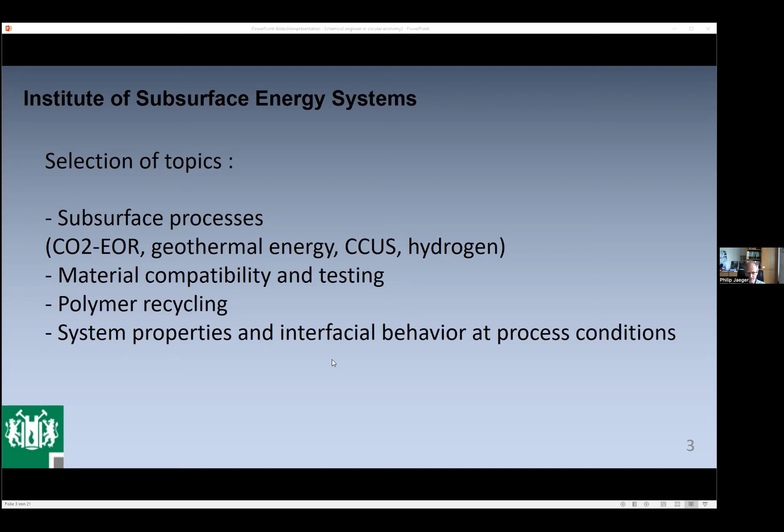What is needed is, apart from the drilling, which is more the mechanical engineering side, from our perspective of chemical engineering here at the institute, we have to do with material compatibilities of pipelines and all the equipment that is needed. I will be talking a bit about polymer recycling, because part of the tube liners are made of polymers. And what is my specialty is the system properties and interfacial behavior at process conditions.

So let me also advertise a bit for our community, what is so special about the chemical engineer. If you look at this really distinct program from today, you will recognize some of the points I'm trying to point out here. I would say, I hope you agree, my co-presenters here, that we know how to handle energy and mass balances, and we also have a slight memory of what the second law of thermodynamics is. This is why we have somehow the thinking of process efficiencies incorporated, which is also reflected by one of the talks later.

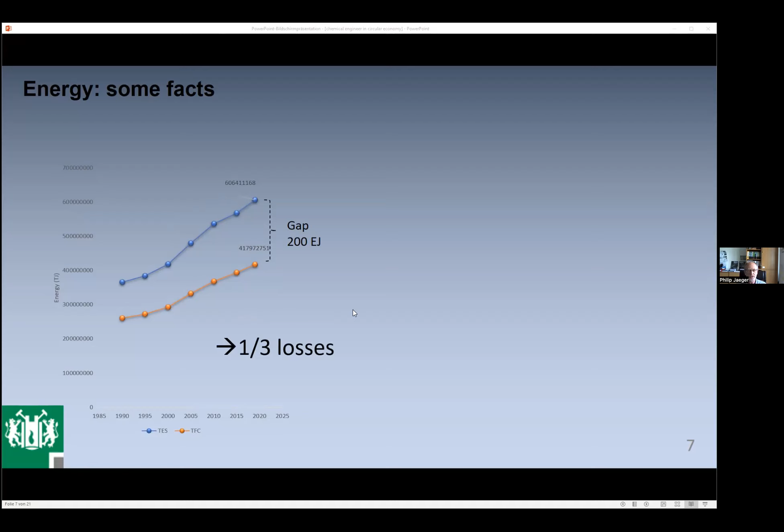On the other hand, we have to ask what is the energy actually used for? We're driving a lot of innovation and inventing super sophisticated methods, and at the end of the day, 30% of the energy is just for low enthalpy heating. So these are points that I'm starting out with to motivate a bit deeper look into this.

So with this background, everyone is talking about the hydrogen economy. Billions are spent from the state to foster this development. And the question is: is the hydrogen economy the solution of our energy demand? So having this in mind...

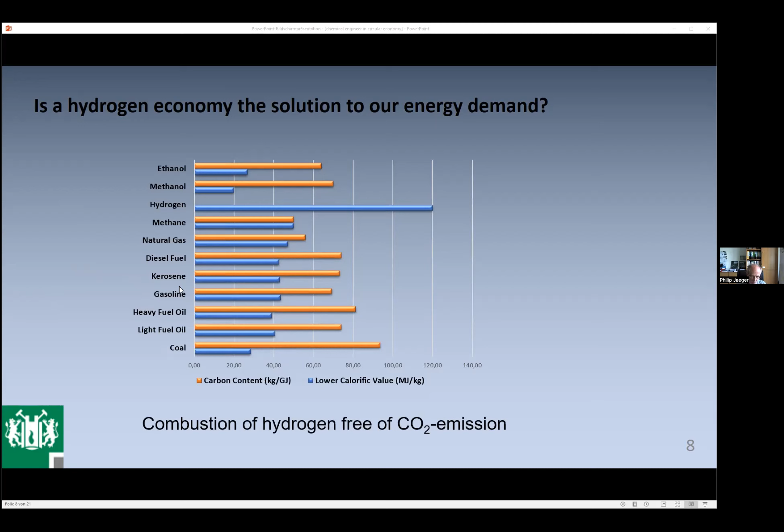In the first place, it looks very promising. Hydrogen has the highest specific calorific value in terms of joules per kilogram, and the combustion of hydrogen is free of CO2 emissions, so best choice.

If we take a little closer look into the energy density, we see - okay, if you compare the mass-related calorific value, you're right, there's nothing better than hydrogen.

But now comes the high-pressure experts and say, okay, what do we have to do to get a kilo of hydrogen? And at the end, we have to provide volumes to store our chemical energy. In the next talk, you will see what it means to store volumetric or pressure energy in vessels, and it's all about volumes. So if you look into this picture in terms of volume-related calorific value, it's getting different.

So hydrogen at atmospheric pressure has nothing actually. And when you pressurize it to 100 bars, which could be a storage pressure in salt caverns, in some of them at least, you're still at less than one third of the value that you can obtain with natural gas, which is currently applied.

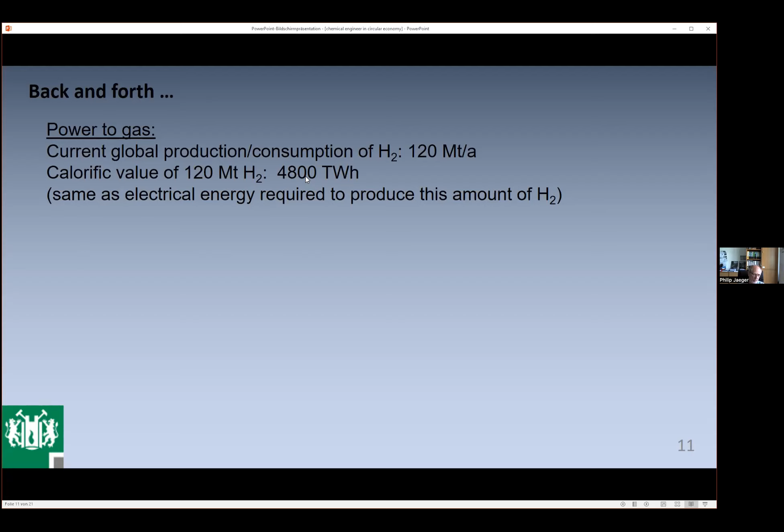But yeah, so we have this hydrogen now, and we have this power to gas - we created chemical energy. As I said, we have around 4,800 terawatt hours of hydrogen calorific value, which we needed about the same amount to produce. But now we have to transform it again back to power.

And then, what do we have there? Like fuel cells, combined localized energy plants or power plants, or the electrical vehicle with its efficiencies. And here some numbers that are also interesting to have.

The electrical vehicle needs 15 kilowatt hours per 100 kilometers. And at the end of the day, you can store maybe 4, maybe 6 kilograms of hydrogen in such a tank at very high pressures, up to 350, or in an individual vehicle, maybe 700 bars. But the refueling technology is also a topic on its own, which would fill its own presentation actually.

So at the end of the day, we call it round trip efficiency, and it's maximum 30%. So this whole hydrogen economy, in terms of energy efficiency, is just like a dissipation technology. So as long as everything is driven by solar and wind, we're okay.

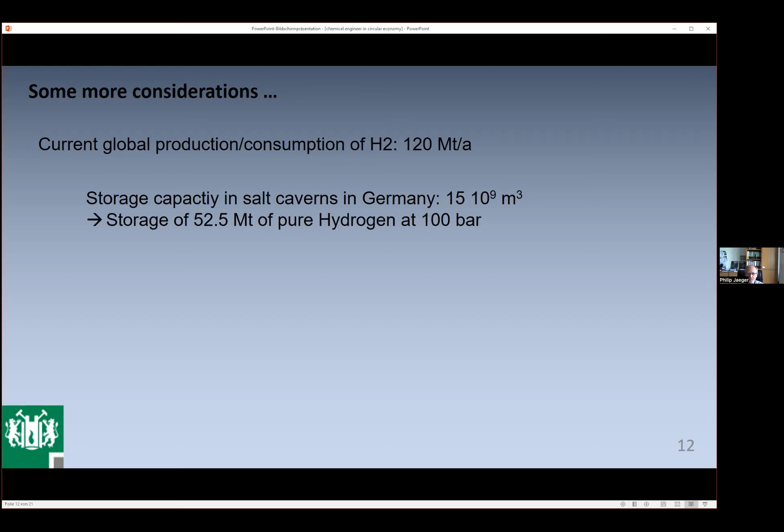So if we solved all of this, hydrogen is still diffusing. It's a small molecule, and we know this from CO2 or from natural gases, how they behave, how they absorb, how they diffuse. There will be hydrogen diffusing to the atmosphere because there's no such thing as an absolute tight reservoir or plug.

And then comes the point: hydrogen is not climate neutral, so it does something. There are reactions going on, or it's working as a scavenger. There's natural gas that is not reacting in the atmosphere when there's also hydrogen present.

So if you look into it really from a scientific point of view and facts-based, you have to say that not even hydrogen is climate neutral. I'm not saying that hydrogen should not be part of the solution, but we have to look at it from a facts-based perspective, and my intention is to give you some numbers to start looking into these processes.

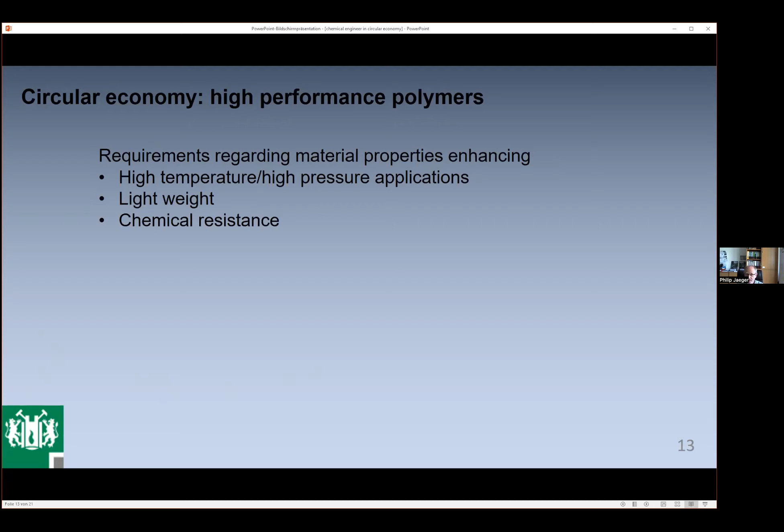The demand is that they should sustain high temperatures, high pressures. They should have lightweight, chemical resistance. So all fine, and we're on a really good way.

But there are also new challenges coming up for recycling. We're just now discussing recycling of the old known polyolefins and the common stuff. And now we already have to talk about what is going to happen with all these new materials. We have to look into the second life already during product design, and think not always of downcycling, not only using the old polymers for wastewater pipes and so on.

So these high performance polymers are used in H2 tanks and pipelines, batteries, and photovoltaic applications, aeronautics, membranes, wind turbines, geothermal wells, and so on.

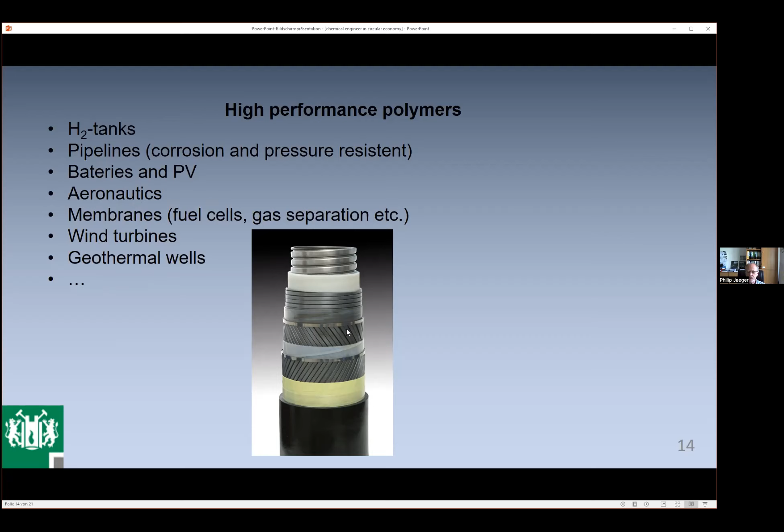This is just an example of one of the materials that is now being re-innovated, let's say, a so-called flexible pipe that is built of a lot of layers. These flexible pipes are used in lengths of kilometers in the subsea for producing oil and gas, but in future also for carbon capture and storage.

And you see here the polymer liner is the essential part, the barrier that keeps the gas and the oil inside, or the fluid or whatever you have inside this pipe, while you have a lot of steel tensile wires and collapse carcasses and everything that make this pipe super heavy and very expensive.

And also failure sensitive. So the new solution is to have fiber reinforced polymers with only one single layer, and they're pressure resistant, corrosion resistant, and everything.

So there comes the problem: how do we recycle these polymer composites? For recycling, we have basically these 5 options.

Landfilling would be the simplest. You just mill it and grind it, then mix it with some other stuff for making streets or houses. Then incineration, now commonly called thermal recycling, which is technically simple, but you have these emissions, loss of material. This is a no-go in the future.

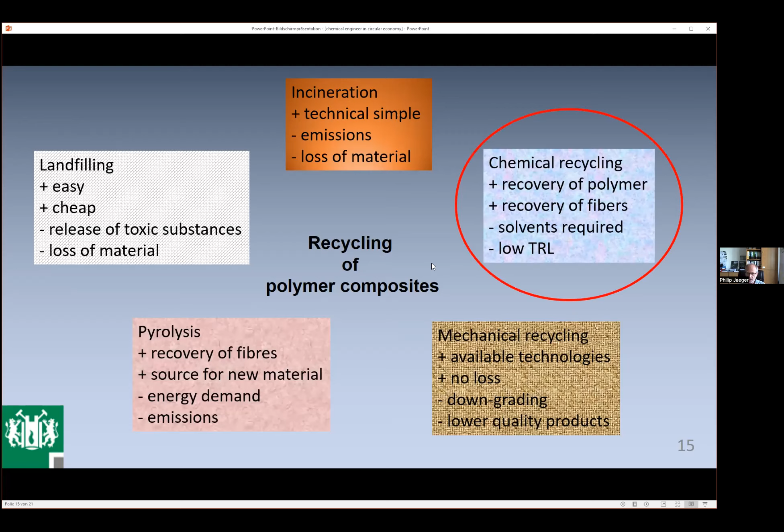But if we look into this, maybe we as chemical engineers can add some value to it. The chemical recycling would work through solvolysis, and somehow you have to separate the polymer and the fibers. At the moment, the fibers are very valuable and are very high price products. So we come here as engineers, as chemical engineers, to find a smart combination of these processes. Since we are able to think in analogies and synergies, we may be able to come up with a solution.

And we have to think of a market for a new product. I'm talking here to specialists in this area, which I'm not, but we will listen to some talk later about this new type of materials.

So coming to my last point, actually the education. Nothing in innovation and development will happen if we don't have skilled personnel. So there's really a demand for knowledgeable, critical, and creative brains.

And this is what I was finding—I was working in industry before, and I came back to university here 3 years ago, and I'm seeing how this development goes. The lack starts already at school, but it continues at university, especially the point of critical and creative brains. If you're just learning and focusing on your exam, you may not have time to really think of innovations.

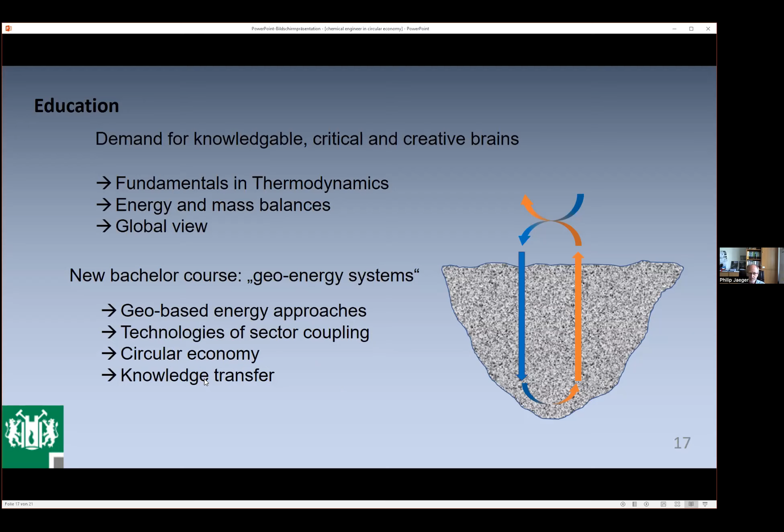Circular economy, of course, should actually be common sense and knowledge transfer. Just as an example, at the beginning I pointed out that 30% of the consumed energy is actually for heating at low to moderate temperatures. So why should we combust high valuable natural gas to heat our houses if we only need like 30 or 40 degrees?

At the moment, the heating demand—this 30% that's lower than 90 degrees—is covered by oil and gas. And even what we call Fernwärme, the long distance heating, is more than half fossil fuels. There's only a little portion of renewables really implemented here.

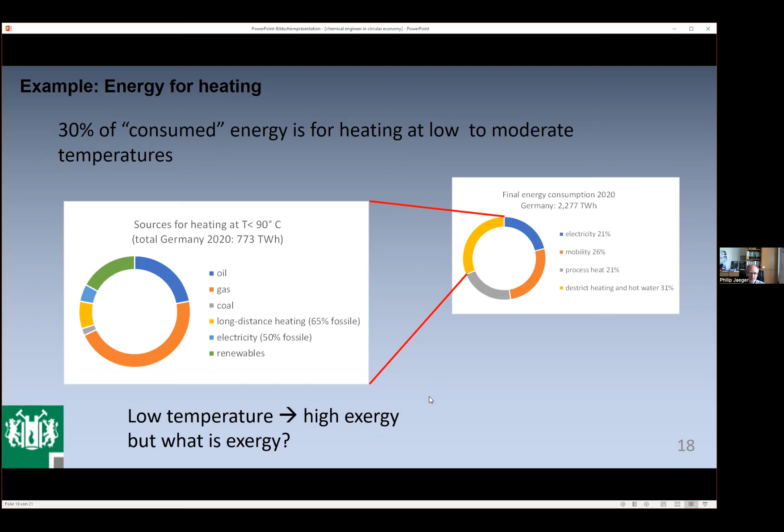What these students have to learn is, as I said, the thermodynamic fundamentals, and that low temperature is high exergy. And what is exergy? I'd like to leave you with this question.

And just finish by saying, what are the challenges for our future education? Because we're focusing on simplified concepts that are offered by the media and politics, and we have to give answers—like maintaining objective standards, supporting broadening perspectives, and generating the conscience for the consequences of what we're doing and what mankind is doing.

But we shouldn't leave out of our focus generating curiosity and fun, which in my opinion is getting lost. So technology is increasingly becoming the bad boy as such, because there's always some sort of consequence of what you're doing.

So our challenge is, just to sum up, and getting back to the very first slide, to make use of energy saving as an energy source. This is also to create a conscience for this, to apply the energy and mass balance on a global scale in the right way, to minimize the exergy losses and to provide high quality education, which is sustainability goal number 4. I want to thank you for your attention and for listening, and I'm open to questions.

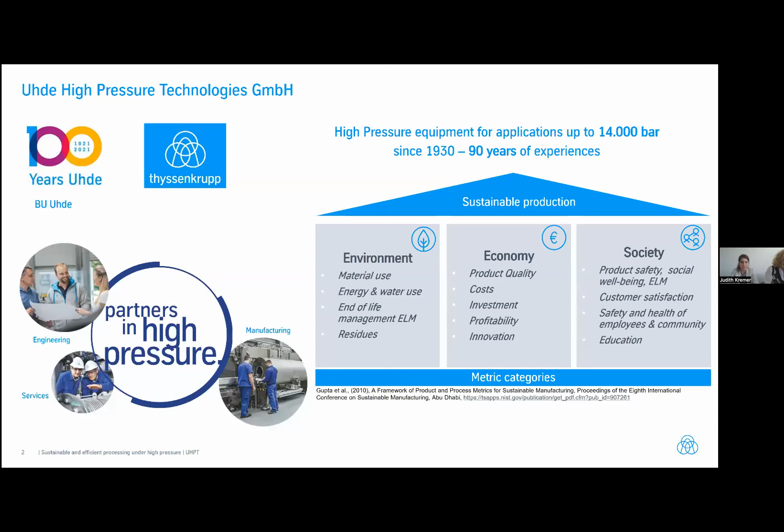Creating sustainable products means using sustainable processes that minimize negative environmental impacts, conserve energy and natural resources like water and gases, that are safe for employees, communities, consumers, and at the end of the day, that are economically sound. Our examples of Uhde activities today are intended to tackle some of the metric categories within all three aspects: environmental, economical, and social aspects of sustainability and sustainable manufacturing at different stages of the life cycle of high pressure units. Just before we go on, in a nutshell, what are our products for high pressure processes?

Starting from the lowest pressure applications, we produce valves and pipelines for the chemical industry, fertilizer units, urea units, then further on autoclaves and pipeline reactors, heat exchangers, and high pressure pumps also for the chemical industry, LDPE plants. That is a very well established part of our business. For high pressure, we also build high pressure equipment like high pressure pumps for water jet cutting, which are used in a variety of sectors, from material industry and automotive industry to food industry, for example, to remove bones from fish fillets in a very short time.

Today our examples will refer to our turnkey solutions, which are lab, plant, and industrial scale units for high pressure processing using supercritical fluids up to a pressure of 100 megapascal, used in the pharmaceutical, food, and material sectors.

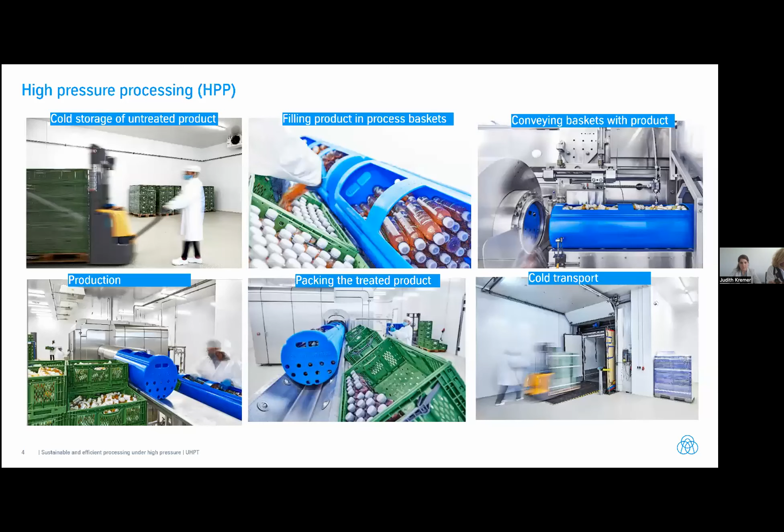Production of HP units dates from the late 90s, starting with production of pressure assisted thermal sterilization, so-called PATS units, with a horizontal high pressure vessel and an internal intensifier, combining pressure and temperature simultaneously to achieve, for example, sterilization effects in a very short time.

These units are still produced today, and they are mostly used at universities and institutes for research and consulting activities.

Ten years after starting production of PATS units, the company used accumulated know-how in building high-pressure vessels and equipment like high-pressure pumps, as well as other resources in-house, to build standard HP units for industrial use. Today they are sold in various sizes worldwide, from Oceania, Asia, Europe, and the USA.

The first concerns about sustainability start in the design and manufacturing phase. Namely, all the core components of the high-pressure units, like the high-pressure vessel, the high-pressure yoke - that dark blue frame which absorbs the axial forces during pressurization of the vessel - the pipeline, and the components of the external intensifiers, which are intended to build pressure in a very short time, are exposed to very extreme pressures and highly corrosive fluids like tap water.

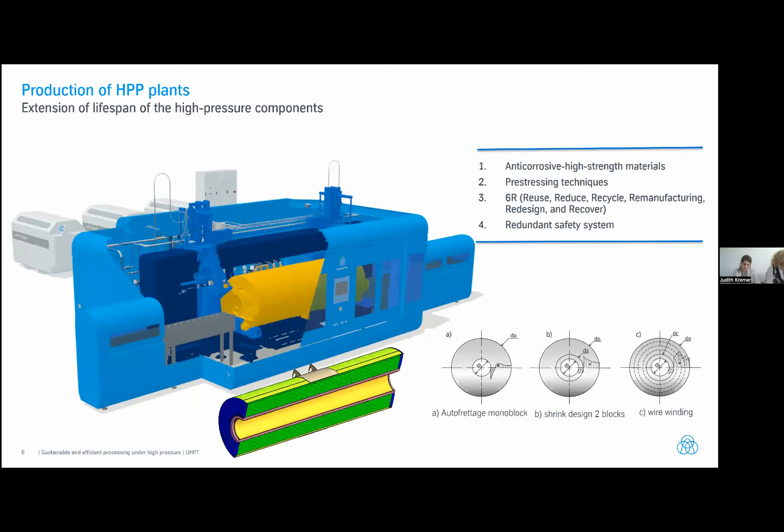The same methodology is used also for the yoke, for the frame. It's not only design, but also use of the units can decrease not only operative costs and investment.

It is also possible to decrease CO2 footprint and energy consumption by smart use of these units. For example, by choosing the right geometry and size, as well as the type of packaging, we can also influence the energy consumption per kilo or liter of the product by increasing the filling rate of the high pressure vessel with the product.

By using bulk packaging like bags or kegs, for example, to produce juice, we can also decrease the use of packaging material, which can be correlated, for example, with CO2 equivalents.

This is just an example for comparison. If you use kegs instead of small smoothie bottles of 250 to 500 milliliters, we can achieve three times less PET use, 4 times less energy consumption per liter of juice, and up to 3 times less CO2 footprint.

Also, HP units are used for sustainable food production commercially, for shelf life extension, safety, efficiency, upcycling, and added value. All these applications can contribute to sustainability in all 3 aspects: economical, social, and environmental.

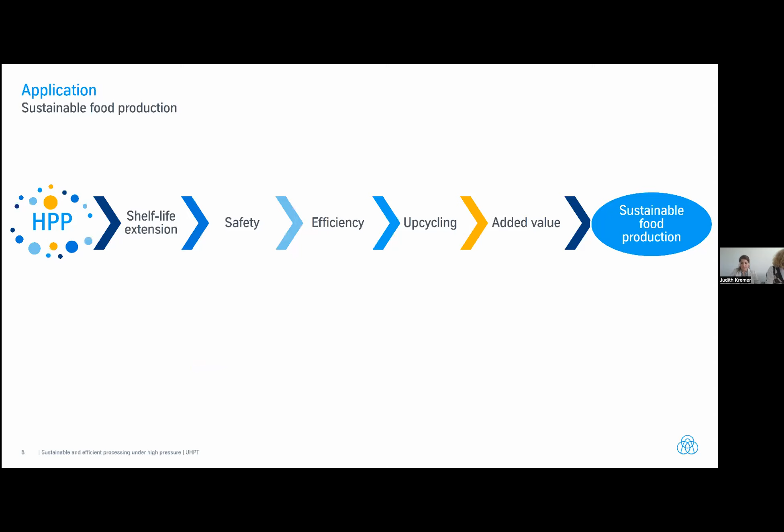For example, by extending shelf life, we can decrease food wastage, overprocessing of food, and save resources like water and land. We can also improve the local economy because local producers can place their products on distant markets and profit from it.

Increasing the safety of the products is very important for improving public health and the environment, and has a positive effect on the environment because of less meat to be disposed of, and this can also be correlated with CO2 footprint.

Efficiency: HPP can be used also to open seafood without using a knife, without contamination and discard of the product. It can be used to get a product with high quality, higher price, and it improves also the well-being and safety of the employees.

Very popular, Professor Aga said, a circular economy. Also with HP, we can contribute to that by using discarded vegetables to produce high added value products like smoothies and profit from it, while saving resources at the same time.

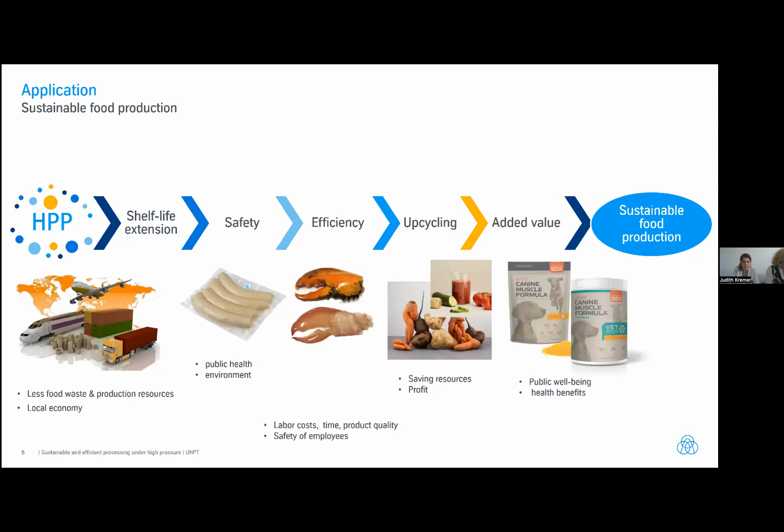Also, other plant bioactive components can be concentrated and kept safe in food. So it is good for the well-being of society.

This is just for illustration, what kind of numbers can be used to correlate the influence of the process to the CO2 footprint and energy saving per kilo or liter of product.

Also transport costs. Here you see the shelf life extension can be from a couple of days to a week, or a couple of weeks up to a couple of months extended, which helps to save a lot of transport costs, reduce overproducing of food, and is also helpful for the environment.

Efficiency also affects the yield of the product, the hygiene of the product, and quality of the product, which can also be related to some financial metrics like profit, or savings of food and resources to produce the seafood.

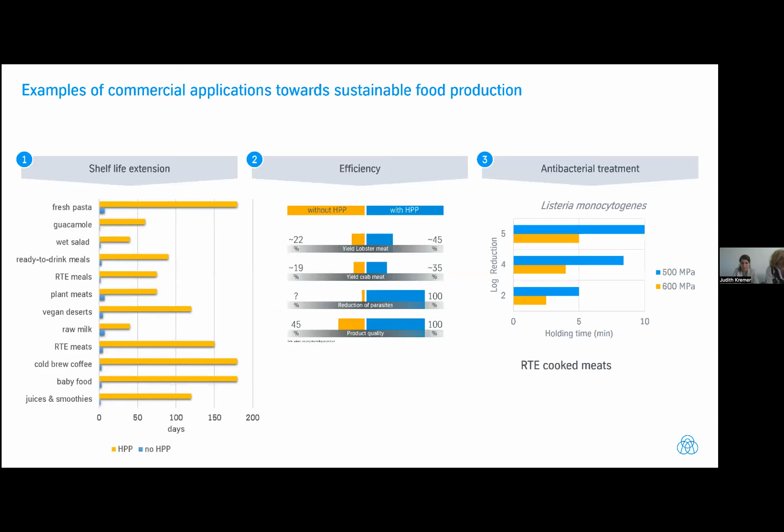Of course, the reduction of contamination of meat with HPP saves a lot of meat which would normally be discarded because of normal pathogen spoilage.

Among the applications, the fast-growing markets for HPP are definitely the meat sector, juice sector, and vegetable sector. But in the last 10 years, HPP service and contract service for the treatment of different food has also become a very well established method.

This supports local producers who don't have the budget to buy the machine, so they can use and benefit from HPP methodology. That's why we also opened our HPP center in Germany to support the local economy by offering the machine for the local industry.

But that's not the only sustainability aspect covered by this. We also use this center to improve our equipment, optimize production processes, test new components in the real industrial environment, and explore new applications with our partners in pressure - our customers, DIL as a strategic partner, different universities, professors and students. We look forward to seeing you in our HPP family.

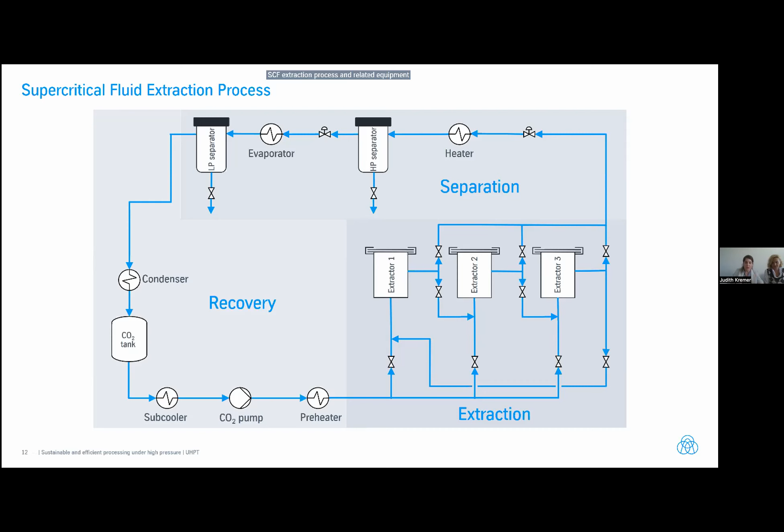This one was for extraction, therefore it has a high design pressure of 1100 bar, only 2 extractors, 2 separators, one operating at a quite high pressure, 200-300 bar, one operating around 60 bar, then the CO2 pump required for the process, the buffer tank, heat exchangers, valves, instrumentation, and everything.

So the footprint of the whole system is quite compact, roughly 9 to 6 times 6 meters. So it's one of the smaller systems, I would say.

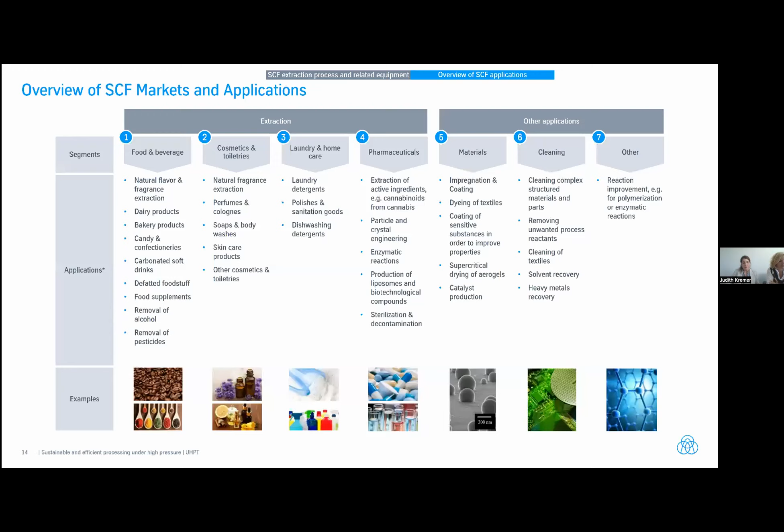In another talk you will hear more about special materials which can also be produced using supercritical CO2, when you look at aerogels, but you can also use CO2 for impregnation, coating, and so on. There are a lot more. But why are there so many applications?

That is because supercritical CO2 provides, I would say, unique advantages when used as a solvent. You have a quite gentle treatment of the product because you have low process temperatures, around 40 to 50 degrees for most of the applications.

You do not have the need to process your product with organic solvents like hexane, which could leave residues in your product or which must be separated with quite an effort from your product after extraction. You have an easy separation and only a few process steps when you use CO2 extraction, so it's quite an easy process, as I already established.

Furthermore, CO2 is non-toxic and environmentally friendly, therefore it is usually considered a green solvent. But with the increasing demand regarding sustainability, I would like to have a closer look if we can make the process of CO2 extraction even a bit more sustainable than it is right now.

For example, we have a kind of loss when we depressurize extractors after the extraction to atmospheric pressure. There is a bit of CO2 which we lose in smaller systems or in industrial systems. So again, coming back to the process flow sheet from before, I'm talking about the highlighted area in orange here, the recovery or supply part.

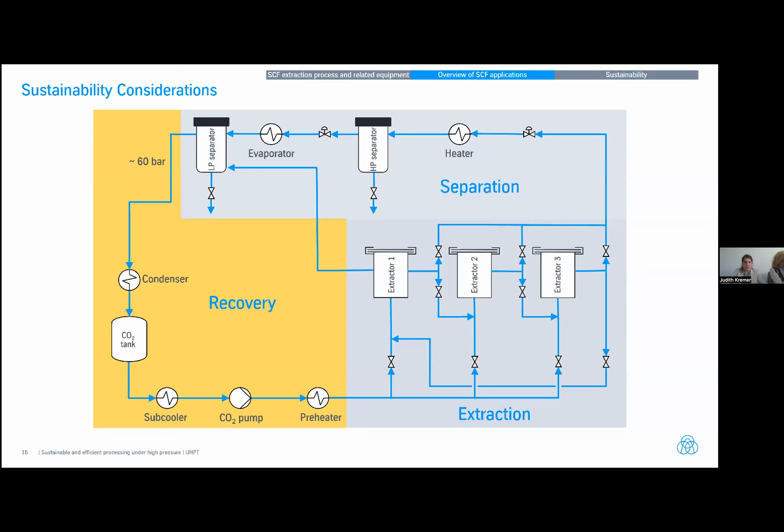We usually use or reuse the CO2 during depressurization of the extractors down to a pressure around buffer tank pressure, around 60 to 70 bar or something like this. So from extraction pressure to the 60 bar, this is recovered, but the rest is discharged to atmosphere, for example in the smaller systems, in a lot of systems.

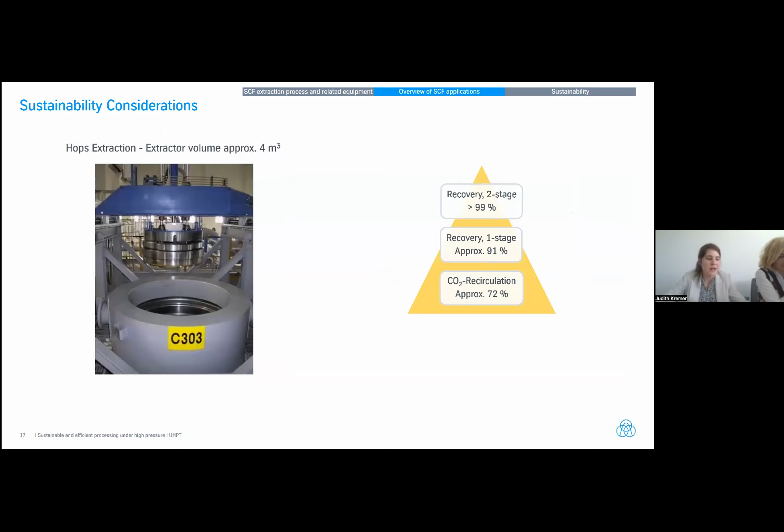This is fine for smaller systems, but if you look at the industrial side, for example a hops extraction plant, which has several extractors with a net volume of approximately 4 cubic meters, so these really large vessels, there, with every cycle, we lose CO2 from 60 bar to atmospheric pressure, and this gives us a large CO2 loss.

With the normal CO2 recirculation from low pressure separator to the buffer tank by just condensing it, you can reuse approximately 72% of the CO2 which is inside the vessel during extraction. If you add a one-stage recovery system, which consists of some vessels and a compressor, or just a compressor, you can recover approximately 91%, so approximately 20% more of the CO2 which is inside the vessel.

And when you even add another stage, a two-stage system, for example if you add another balloon to the system, you can recover more than 99% of the CO2 which is in the vessel during extraction. Of course, you have further losses in your process, meaning you will have some losses during venting, cleaning, or other things, depending on pressure, temperature, and times, which are not considered in my small example calculation here.

But what you have to keep in mind is, of course, we recover more CO2, which is a good thing, but we also have a high power consumption because we have more equipment, meaning more investment costs up front, and also a higher energy consumption because we have to run the compressors, and also add some coolers to the compressors so our CO2 would not get too hot for the process. Therefore, it's always a bit of a trade-off what you would like to do, and it's really worth it to calculate if CO2 recovery, and what kind of CO2 recovery, is the best solution for your specific system.

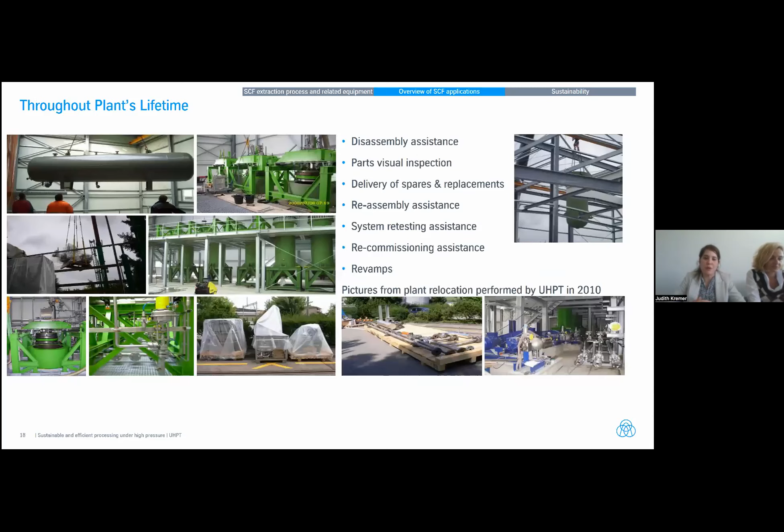Jasna and Judith, many thanks for this extensive information that you presented. We have two questions. First question for Jasna: is it possible to send references of the results of the carbon footprint presented? They look interesting, but I have some doubts.

Yeah, it is possible. These are basically public data which are used, some from the Austrian Institute. They calculated CO2 equivalents for the production of one kilo of PET, and we combine it with our information on the filling rate, so yeah, it is possible to send it. My email was on the last slide, but it can also be found on the internet site, so they can send us a request.

Okay, thank you very much. The next question is: what properties define the shelf life extension, and why are there such big differences between them, like such as milk and baby food?

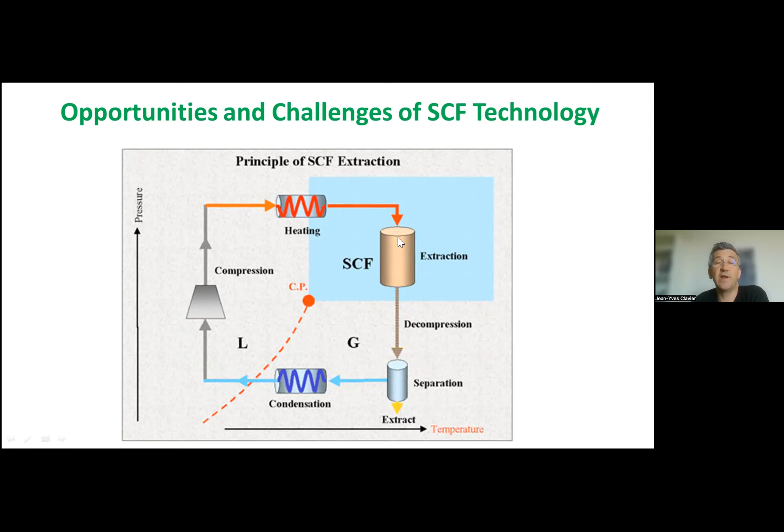Now, after speaking of the opportunities, when you look at the challenges, we have quite a lot of limitations to deal with. The technology is a high pressure technology. Uhde is quite an expert, and we had a nice demonstration, but still we have to face the cost of the technology, even if, as Judith showed, it is a long-lasting system. We can use it for several tens of years. We also see some systems that are 40 years old still working very nicely. So we have to take that into account when we try to convince customers to use this technology.

And we also have to admit that when we use flammable solvent, it is also costly. So we have to deal with the cost.

We use CO2, as I said, but one limitation is that we don't have so many choices. So using CO2 induces a limited range of application, because CO2 is a very nonpolar solvent, and we usually have to face very limited solubility of our product. So sometimes it's an advantage when CO2 is a good solvent, but it really restricts the number of potentially economical applications. But well, we have to face that. We cannot play with this as engineers.

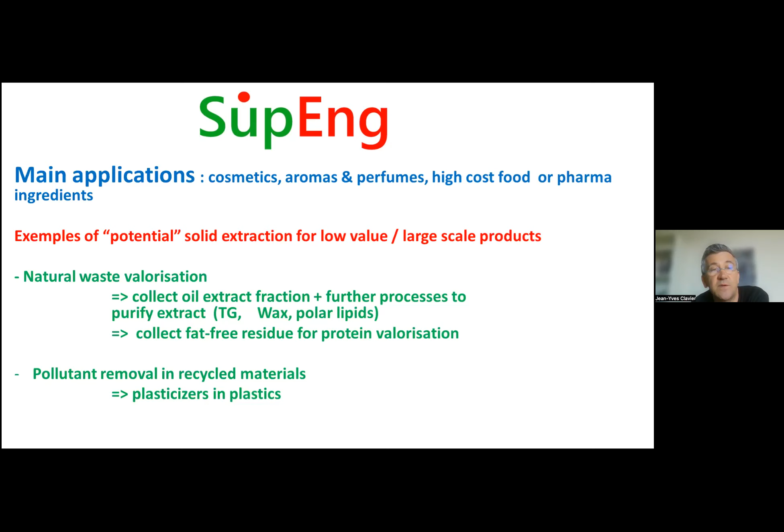So let's try to see what are the consequences for the optimization and for the chemical engineers.

We have to use the system as well as possible, so usually we try to make it as continuous as possible for the CO2 loop. We try to pump continuously, and this is why, as Judith showed, we use several extractors. We have one that is continuously extracting and the other one used for this sophisticated depressurization procedure for changing the product.

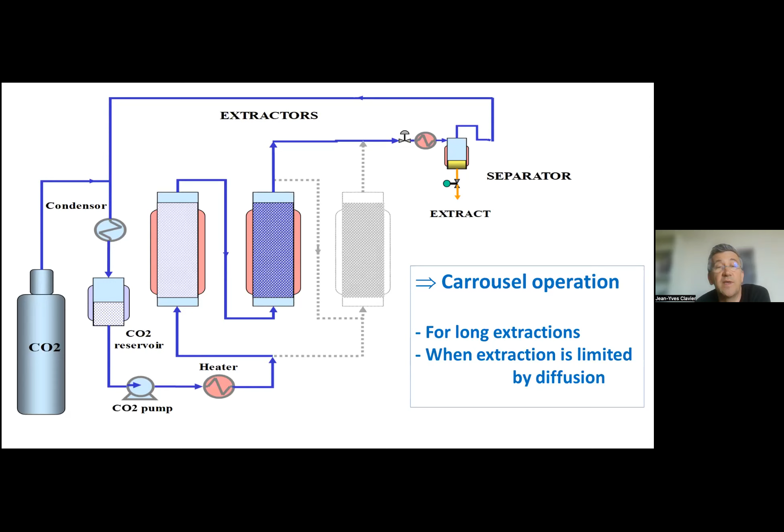We have a relatively quick extraction at the beginning, and a long extraction at the end. This is always observed in natural products. Usually there's a first step that is quite efficient, where you're limited by thermodynamics and solubility, and then a second, much longer phase. So you have to find an optimum between efficiency and the amount of CO2 used.

This is the role of chemical engineering: to optimize this, to first identify what is thermodynamic limitation, diffusion limitation, and hydrodynamic limitation. This is really standard chemical engineering work, but what's a bit specific to this high pressure technology is that we have to use specific tools and methodology to estimate all this.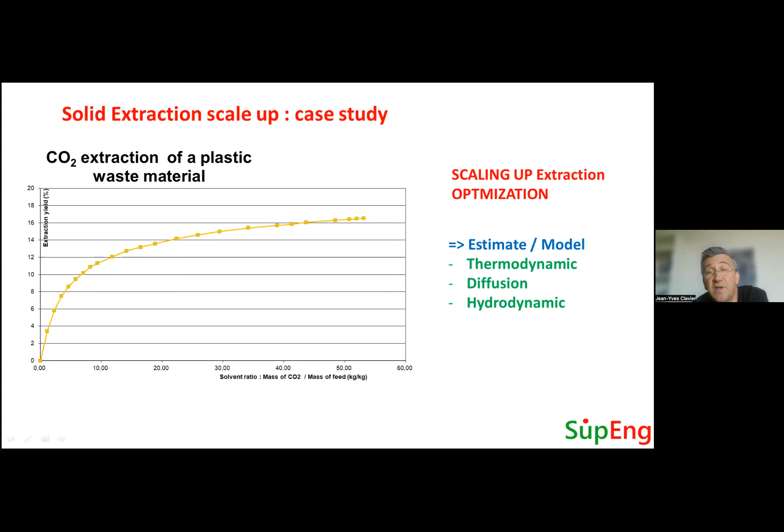So we try to estimate thermodynamics, diffusion, and hydrodynamics. For solubility measurements, for instance, we use this kind of sapphire lab system. You see one example here. We place the pure extract in the cells, with a little flow of CO2 that we try to saturate, optimizing the contact. What comes out allows us to determine the solubility of the extract in CO2.

The good point about this technology is that we can easily play with temperature and pressure. This is a very good example of extraction of plasticizer from plastic, as we have very, very good solubility, which is quite an exception, but we have to take this opportunity. By optimizing the thermodynamics, we can reach a domain above 400 bar where we have full solubility.

We're actually in what could be called the supercritical state of the mixture, because whatever amount of extract we put in the cell, if we pressurize to these conditions, we have only one phase. So we can say we don't have any thermodynamic or solubility limitation for this extraction. This is a very nice extraction, and from my point of view there's great potential for this recycling of plastic.

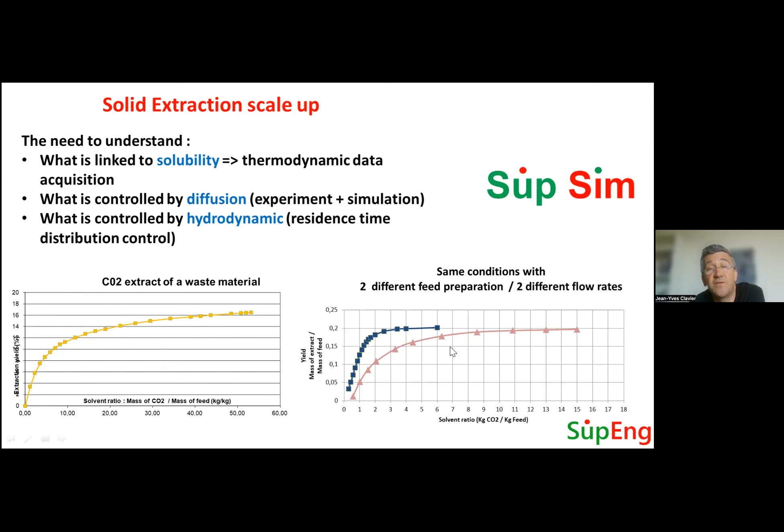So again, we have what is already used in all the production equipment, this carousel operation mode. Optimizing and understanding this application allowed us to determine what were the requirements in terms of feed preparation to minimize diffusion, also to put some specification to have a good control of the hydrodynamics in our vessels.

And as it is a very large scale application, like Judith said, we have to maximize CO2 recovery to minimize the impact, repressurizing the vessels in these steps of depressurization to minimize the CO2 remaining in the vessel, and also optimize the depressurization, because even if you depressurize correctly, CO2 has a great affinity for the plastic, and we have to adapt the procedure to minimize this amount of CO2 that remains in the plastic.

So in order to conclude these first steps related to solid extraction, there is a great work of chemical engineering to optimize the process. But there are also two very important points we have to manage in any large-scale application: optimizing CO2 recycling. What we talked about, both Judith and myself, is a process of CO2 recycling when we pump the CO2 in the liquid state, but in some processes at lower pressure, we also have to consider gas recompression with a gas compressor that could be more economical for energy.

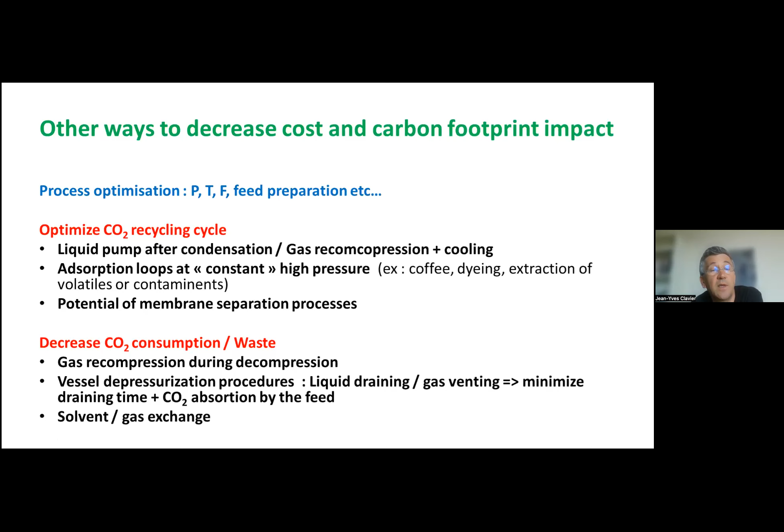So yes, this is the conclusion of the solid extraction. We have to minimize energy, maximize CO2 recovery, and try to make the process as continuous as possible, including the product handling. And of course, use CO2 only where it is good at. On my side, I'm convinced that there are not so many applications, and we really have to focus where CO2 is good at.

What is true for CO2 is also true for other solvents. The solvent I presented is subcritical water extraction. We use water in a pressurized state to be able to increase solubility in water of less polar compounds. So we use water at 120 degrees up to, let's say, 200 degrees to modify the solubility of the water. And this opens a range of new applications for water, basically comparable to some mixture of an alcohol with water.

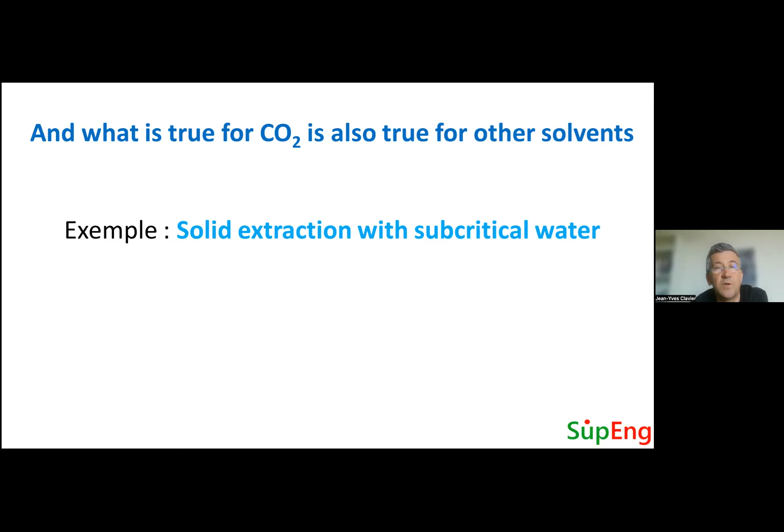But again, we are faced with dilution and too high energy requirements compared to this heating of the water. And if we dilute too much, we are just not economical. So again, we try to develop a continuous process. And here, as we have lower pressure, the pressure in the subcritical water can typically be between 5 and 20 bar, so it's easy to use extrusion-like extractors where we push the feed with screws.

This has both the advantage of having a lower dilution. We can also press the cake of solid at the exit of the extruder, and we can therefore minimize the dilution. We obtain factors of dilution about 4 times, and this makes the process much more attractive.

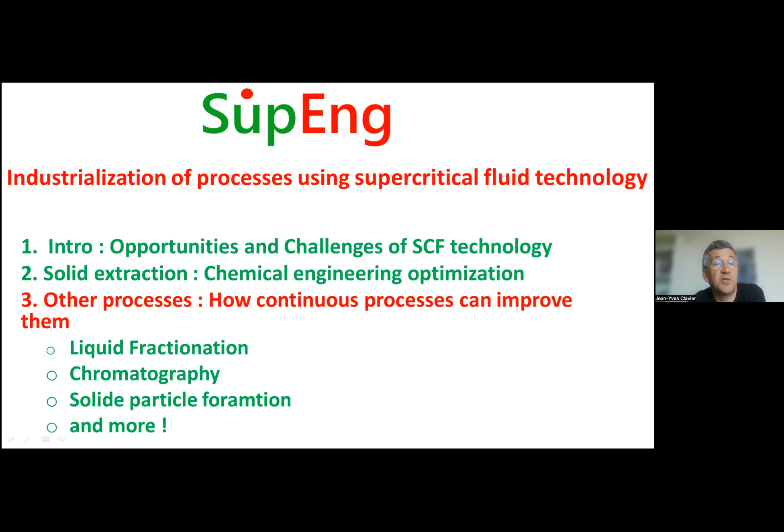Looking at other processes than extraction, we will see a little bit more about this continuous process and how it can improve the energy requirement and the sustainability. This is quite a usual idea for chemical engineers. So the topic is: is it possible at high pressure and for supercritical fluid technology?

The first process we can talk about is how to process liquid with supercritical fluids. This is much easier, as we don't have a solid, we have a liquid, so we can pump it and have contact between the liquid and CO2. We can even contact them countercurrently, pumping the liquid in a column at one level, with two sections, below and above the feed introduction, to have an enrichment section and a section at the top that plays a role like reflux in distillation.

So we have one introduction and two exits: an exit at the top for the products that are extracted. This gives a light fraction called extract, and a heavy fraction called raffinate, and we can have very different fractions on these two streams. We can also imagine having a reflux of extract introduced at the top to increase the selectivity of the process, like in standard distillation.

This has been developed over the last 30 years. There are not so many applications at large scale, but it can be modeled quite efficiently now. We can represent the column as different theoretical stages, and in each stage estimate an equilibrium and some mass transfer. We model an equilibrium between the two phases, heavy and light, add a model of mass transfer, and by adding diffusion, hydrodynamics and thermodynamics, we can get good models for this.

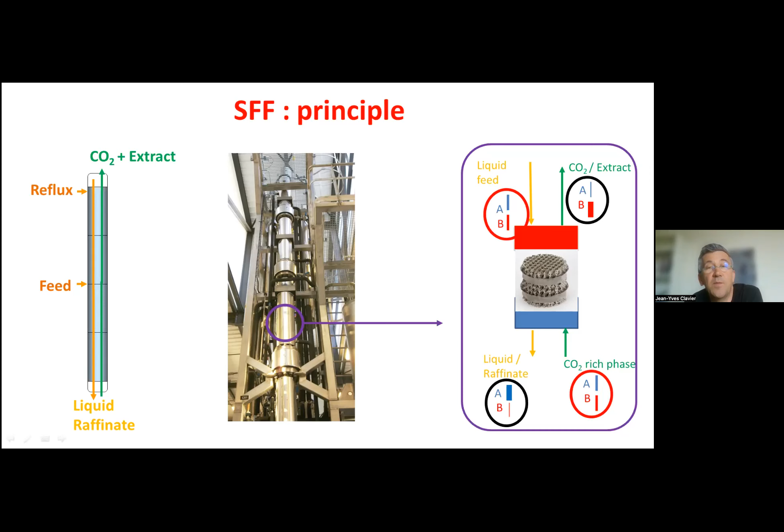One example developed over the last 20 years is the fractionation of omega-3 ethyl esters to concentrate heavy omega-3s, the famous EPA and DHA. We've worked a lot on this application to concentrate omega-3 and maximize the yield. We obtained very good simulation results and experiments that fit very well with this simulation, but this leads to quite a high ratio of CO2 over feed, which has a significant cost.

You always need to compare the green aspect of this technology with the economic aspects compared to other technologies. For this technology, the competitive process is molecular distillation, where you don't have CO2 — you just need to evaporate the oil once. You can of course manage a reflux too, but we've never been able to make it useful at industrial scale because molecular distillation was always much more interesting in terms of energy.

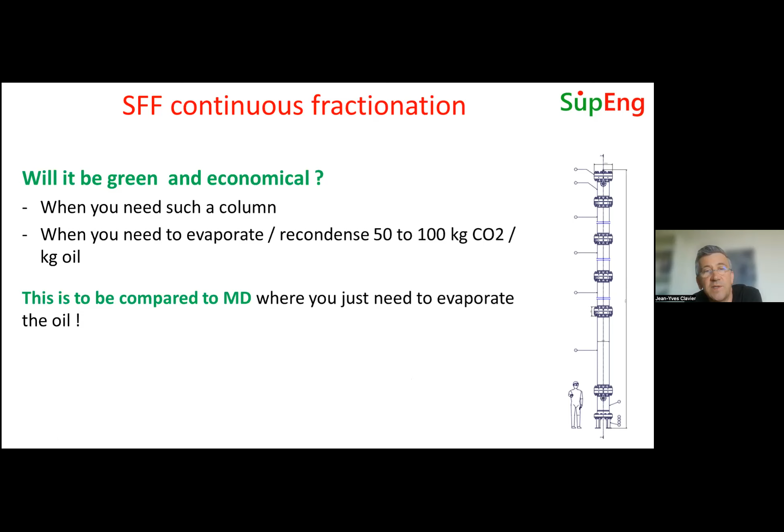But this has not been widely used, though some people have built nice columns of 12 meters, 400 millimeter diameter, for some applications used in Asia, in India, for purification of capsaicin, achieving enrichment factors of 4 times the initial content in capsaicin in a pepper extract. I'm not convinced we need such a high column, because most industrial applications of liquid fractionation don't need such selectivity, but this is used at very large scale.

The main applications are for aqueous feed fractionation — for instance, aroma fractionation from distilled or fermented solutions, so aqueous-based solutions that can be purified with CO2. You also have organic solution fractionation from lipids to obtain polar lipids, or further steps after solid extraction for essential oil purification, and also some applications in purification of polymers.

So we are still very optimistic about potential development, but it's not easy to optimize and make economical. The next application I want to present is chromatography.

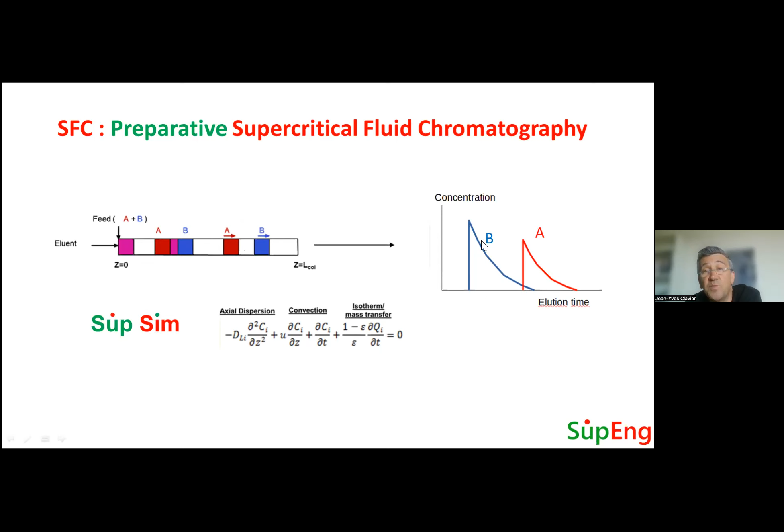As Philip was saying in the introduction, I just added this slide when he was talking. We are chemical engineers, and we never forget the second principle of thermodynamics.

SFC is often presented as a green chromatography without solvent. But if that were true, you'd get a mixture of A and B here, and marvelously, you get A and B separated. That would mean entropy change is negative. So is it the case for SFC? Obviously not — we don't forget the second principle of thermodynamics.

Basically, chromatography's entropy cost is dilution, and chromatography is terrific regarding dilution — it is a very dilutive process.

This is why, before going to continuous, if we look at why CO2 can be interesting for chromatography, it's because we have quick mass transfer, high diffusivities, lower viscosity, so we can go faster in the columns. The consequence is the ability to reduce the columns, the amount of stationary phase on the column side. CO2 is also relatively cheap as a solvent compared to other organic solvents.

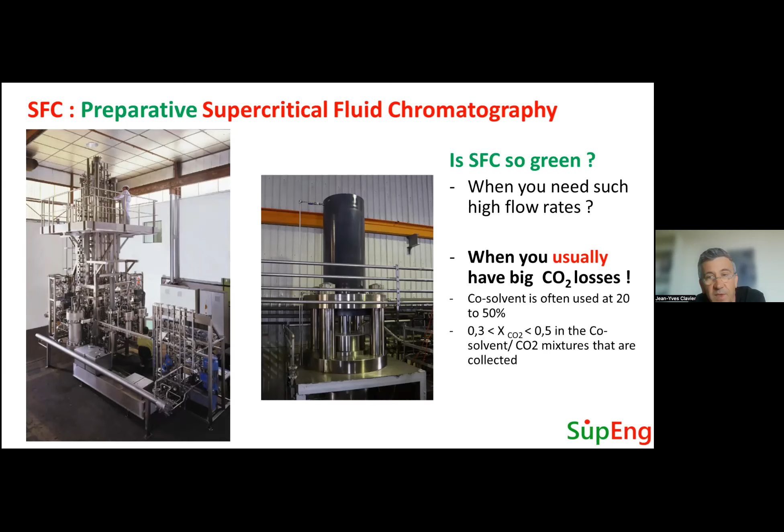When you use chromatography with CO2, what is observed is that we actually use a lot of co-solvent to make it a proper elution solvent for chromatography. It's quite frequent that we use co-solvent up to 20 or 50%.

And here comes another drawback of supercritical chromatography at preparative scale: like in extraction, we have to collect product, and here we collect the product diluted in the co-solvent. When you look at thermodynamic equilibrium in the fractions collected in the liquid phase, you get a lot of CO2 dissolved in these liquid solvents.

For instance, looking at ethanol at 50 bar, you get between 30 to 50% CO2 dissolved in the liquid ethanol. So all this is a waste — huge quantities of CO2 wasted compared to liquid chromatography, where when you recycle all the solvent going out, you're just doing a distillation of all of it.

So you get recycling factors above 98%. Here it's far from being the case. It's cheap, but it has an impact, energetically speaking and carbon footprint speaking.

This is why we try to optimize the dilution, and we have been developing the simulated moving bed, which is a continuous way to make chromatography to reduce the dilution.

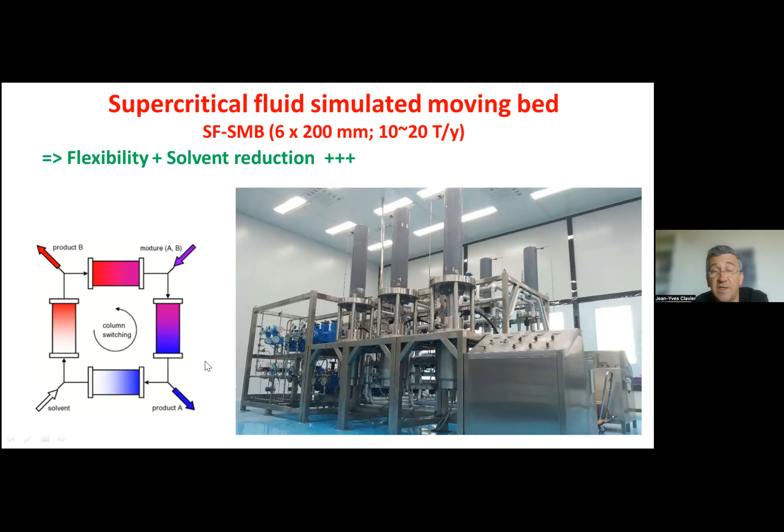This way, instead of using batch chromatography, where we collect the product at different times and repeat the injection and collection versus time, here we inject continuously and collect continuously. We inject the mixture in the middle of the series of columns, and we collect concentrated extract at one point and concentrated raffinate at the other point. Basically, like in many chemical engineering processes, going continuous allows us to minimize dilution and maximize energy recovery.

So going back to the example of EPA purification: when we developed EPA purification above 97%, CO2 was not chosen because it was not economical — it was considered not the best solvent.

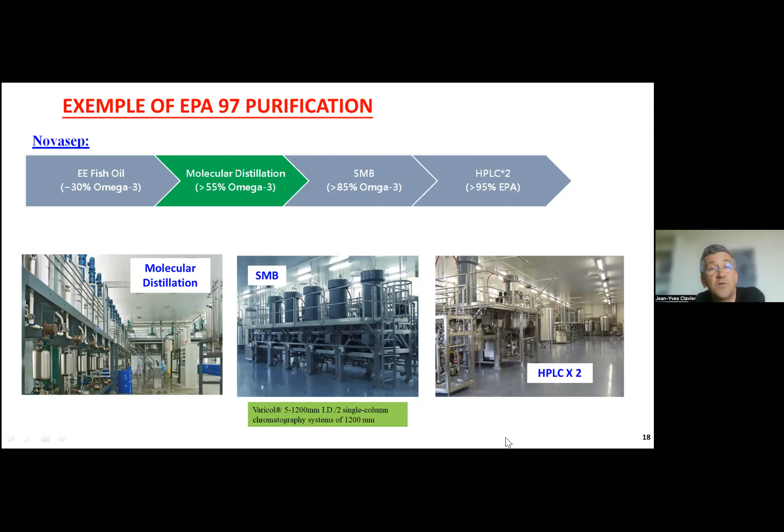The process was developed in the 90s, first with molecular distillation and then supercritical fluid fractionation, and then using liquid SMB and batch chromatography to purify these omega-3 ethyl esters. A very large column has been built in the south of France for this application, and recently, the supercritical fluid simulated moving bed has finally been developed.

We don't use fractionation to enrich the EPA to 60%, but we use supercritical fluid simulated moving bed to enrich it to 97%. And we find again the advantage that I mentioned at the beginning of using smaller columns, of having better productivity thanks to CO2.

Because we can concentrate more and go faster on the stationary phase. But if we have to be honest, the biggest effort has been choosing the right mix between solvent and CO2 to have the best solvent to make this chromatography, and optimizing the CO2 recovery in the fraction collection to minimize CO2 loss. So today we can say that this process is economical, and if we hadn't made these efforts on optimizing solvent and energy recovery, we would have to go back to liquid chromatography.

Going continuous is also a way we try to develop in the crystallization and particle formation process. I don't want to detail all of them, but you can use CO2 in different ways, either as a solvent, and then you depressurize to form some powders, or as an anti-solvent to dilute a liquid solution to crystallize a solid. These two processes, because of low solubility or because you have to spray then dry the powder, usually lead to very high dilution. This is only used for pharmaceuticals because it's very costly.

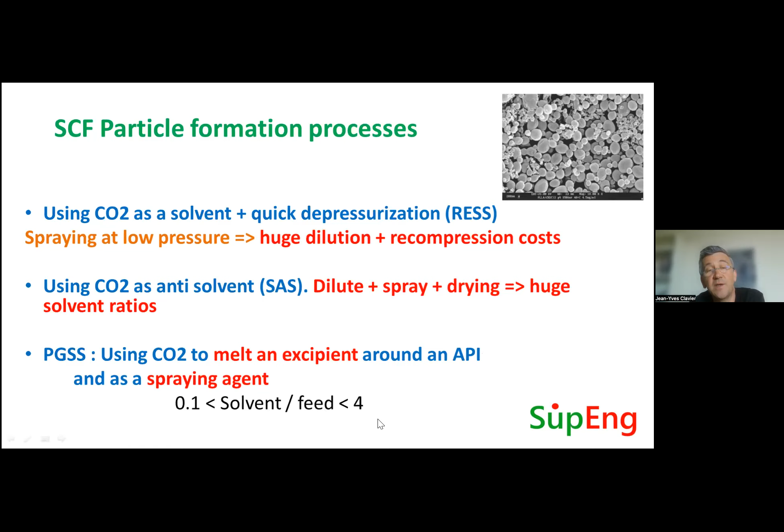The one I want to detail a little bit is what we call PGSS, where you use CO2 to melt an excipient, usually a polymer. Using CO2 allows you to decrease the melting temperature, and basically you use a batch reactor where you melt this polymer. You mix in a product to be encapsulated, and you also use CO2 to spray this at high pressure. Here you get a very nice solvent CO2 over feed ratio, and this leads to a nice application.

When you have an active principle, it can be a protein that you want to protect with an excipient, or a flavor whose release you want to control. So you have several fragile molecules where you want to control delivery and protect them with an excipient. Basically, you have a mixed reactor where you mix all this under pressure with CO2, and then you spray it into an atomization vessel.

This is a bit complex because you have to master the mixing conditions, and it's very difficult to control the transfer from a high pressure condition to a low pressure condition when you don't control the quantities. You control the initial quantities, but you don't control them right after you open the valve in this batch vessel. So using this in batch mode is quite complex.

This is why we developed it at large scale, trying to make it continuous and introducing continuously exactly what we want to have at the exit, with controlled flow of CO2, controlled flow of the melted excipient using it at high temperature, but basically the mix is done at lower temperature, and introducing the active principle to be protected continuously or almost continuously.

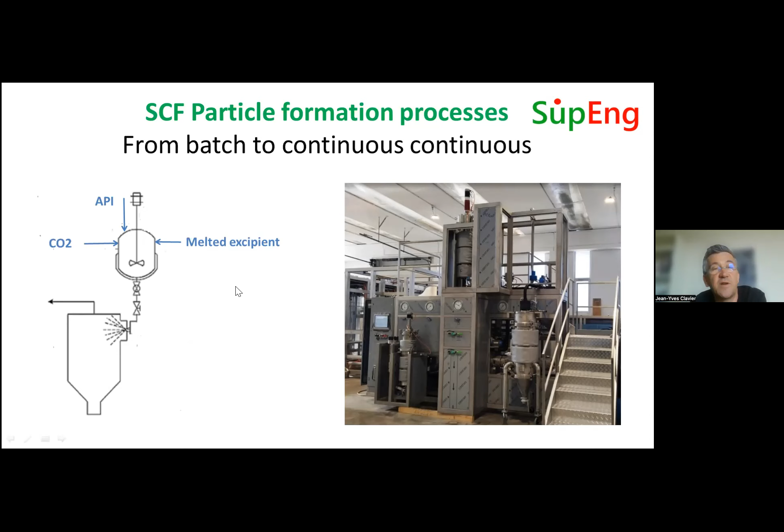So we introduce the three of them independently and continuously. We mix them and we spray them continuously. Going through a continuous mode allowed us to obtain a process that is much more robust and much better controlled for this very attractive particle formation process.

The last one I want to introduce is aerogel formation. I know Pavel will speak of it, so I'll leave him to detail it further, but we are also working a lot on aerogel formation, drying a gel with CO2 to make insulation material, very high quality insulation material. It exists in the form of blankets like this, but what we do at KI is basically make powders and beads of fine aerogel particles that can be introduced into insulation material used in construction or in the insulation barrier for car batteries.

These are two very growing markets, and the demand is huge for these powder aerogels to be introduced in insulation material.

On this industrial project, we took a quite classical chemical engineering approach to optimize thermodynamics. It's quite easy here because we just remove a solvent like ethanol. But we have been working a lot on optimizing the diffusion and mass transfer using a fluidized bed dryer, and also working, as I explained, on the CO2 recycling loop to minimize the energy requirement, because this is key.

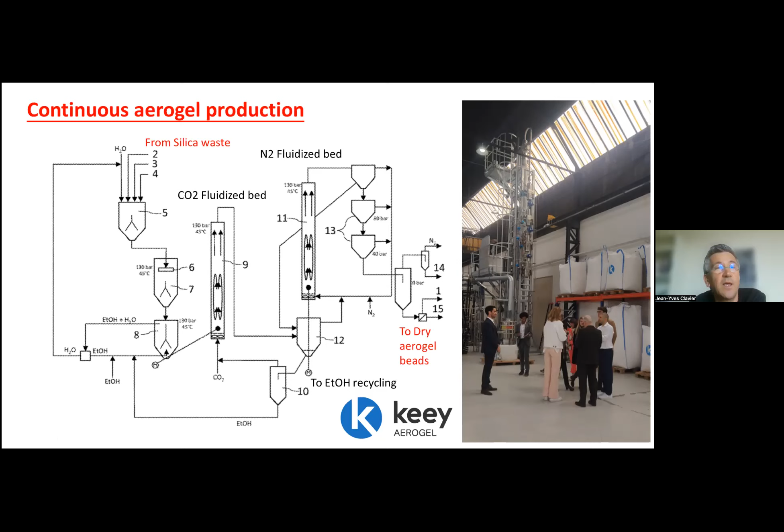My conclusion of this talk is that CO2 technology, we try to convince that it is an interesting technology that is sometimes green because CO2 leaves no residual solvent, that leads to very interesting products like these aerogel materials, that is sometimes affordable when CO2 has the right properties, but with limited application. I don't believe it will be so widely spread, widely used, because CO2 is only used when it can bring good solubility. Otherwise, we have to use the right solvent to make the right energy management.

Always think of the other interesting properties of CO2, like the good mass transfer. As I was saying at the beginning, CO2 is used also because of the marketing. But because of this, a lot of mistakes are still made, and CO2 is not always wisely used. So as chemical engineers, we need to advise on this and apply the overall chemical engineering procedures and systemic thinking and energy optimization, like in all other processes, to make it sustainable. The only difference is that we have to use these specific tools to obtain the right data.

Thank you very much, Irena, and thank you everybody for inviting me. It's a great event organized by the European Federation of Chemical Engineering. I'm very proud to be here. My name is Pavel Gurikov.

The title of my talk is Engineering of Porous Materials from Microscale to Application. I want to bring a bit more understanding of what we mean by engineering, because in the literature you often find very mixed-up definitions of what engineering is. We actually understand engineering very broadly.

The microscale aspect of engineering, often called material engineering or material science, is one aspect—it's about manipulating molecules, objects, and polymers to discover and invent new materials, to characterize them, define their properties, and so on. But there is another side of engineering, often called process engineering.

This is about fabrication at large scale, and it's not only about chemical engineering in particular—we want to take everything we've discovered at microscale and bring it into the fabrication workflow to come up with a material which makes our life better, which makes our society a better place to live.

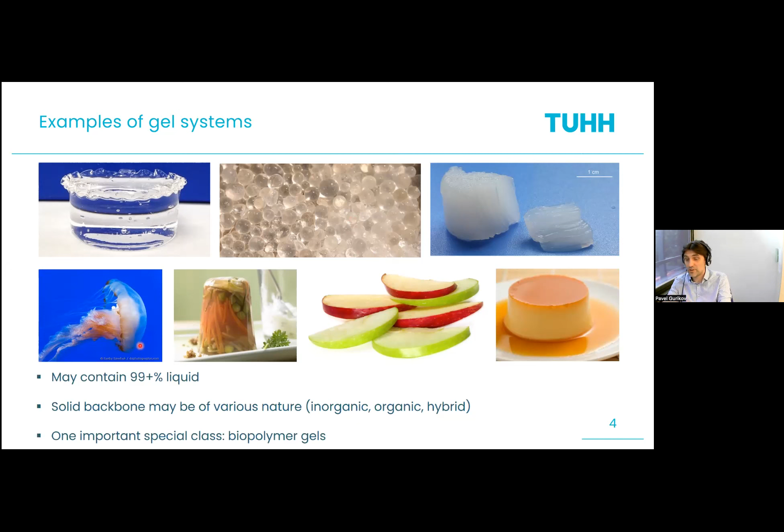So what happens if you want to take all the liquid out of this soft material to make a solid replica of it? Your natural intention is to take this material and try to evaporate the liquid out of this soft thing. Unfortunately, what you experience is what we call capillary pressure, capillary forces—an unavoidable phenomenon that happens in very, very small pores.

This gives me a nice opportunity to tell you that all these porous materials, gels, are made out of pores, and the liquid—water in many cases, but not necessarily—occupies the space in these pores. As soon as you start taking out this liquid, you encounter a very unfortunate phenomenon for drying: the meniscus, the phase boundary, is not flat.

This basically means that you have a difference in pressure between the gaseous phase and the liquid phase. And as soon as you have anywhere a difference in pressure, then this pressure is going to do something to your structure. This capillary pressure is exactly that, it's going to collapse your structure.

What are we supposed to do with this? How do we bring the wet gel into a dried gel state? The answer, because we're in the high pressure section today, is to use high pressure technology and a very powerful fact that liquids and gases do coexist, but only in a limited range of pressures and temperatures.

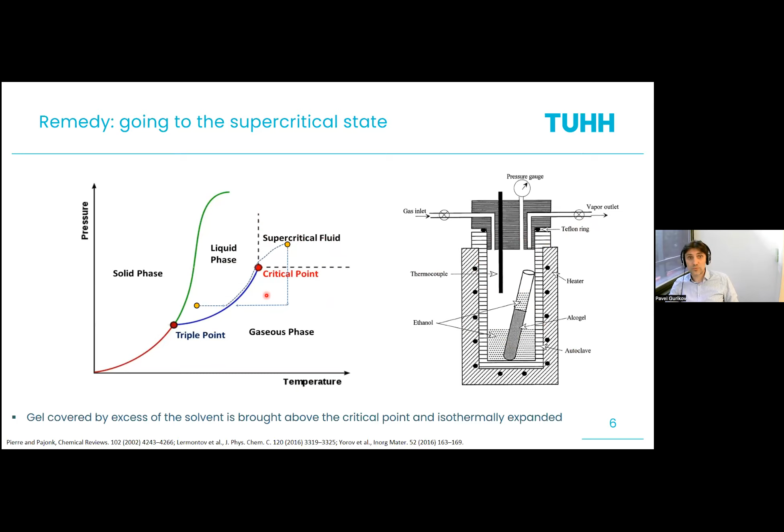If you manage to extract all this liquid out, you end up having this porous structure. If you're able to unfold this, you get a huge surface area. We call it specific surface area, how many square meters of surface are available in such a structure per gram.

People don't do it in the way I just explained, they do it differently. Thank you very much to all the speakers who presented before me, they laid foundations which I don't need to explain. Basically, we take a gel which contains a liquid miscible with CO2, carbon dioxide, because carbon dioxide has a very moderate critical temperature and critical pressure, and many solvents are miscible with CO2, forming supercritical mixtures.

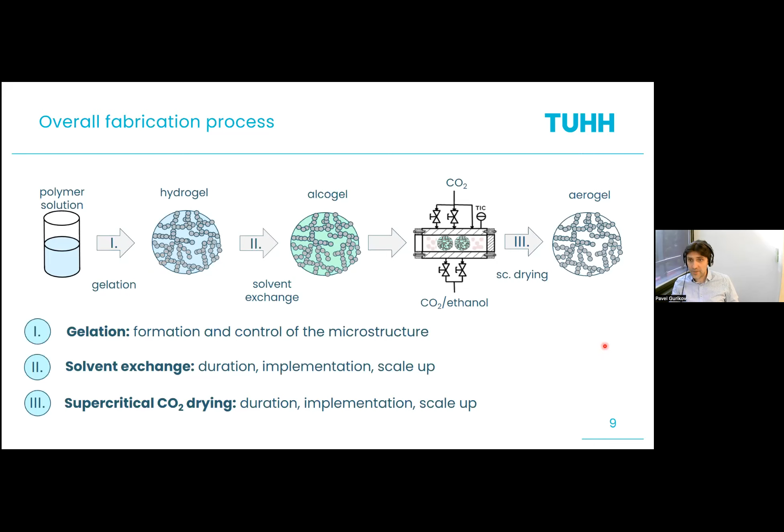At the gelation step, you can also pose questions which are more of a chemical nature. How do I control and tailor the microstructure of the gel for specific applications? That's all questions I'm going to tackle in the coming slides.

A naive approach would be to take the diffusion equation, write it in a proper coordinate system, and say, since supercritical drying is nothing but an extraction, you're not interested in the extract, because as a solvent, you're interested in the raffinate, which is left in the autoclave, the high pressure vessel, after drying. Why not apply a simple Fickian diffusion description?

As is very well known in the literature, in many cases during the process you're going to be off. Sometimes you overestimate, sometimes you underestimate how much solvent you extract. And that matters, because you want to bring the drying to the very end, extracting as much solvent as possible. So obviously this type of equation and description is not complete. It is intrinsically incomplete to give you a correct answer.

But for your creativity to take off, you need some experimental data, and for a long time such data were missing. Only recently, with our partners Andreas Bräuer and his team, we realized we have to really look into the gel to say, here at this particular place, I have this concentration of the solvent and CO2. In other words, you have to spatially resolve the concentration profiles within the gel.

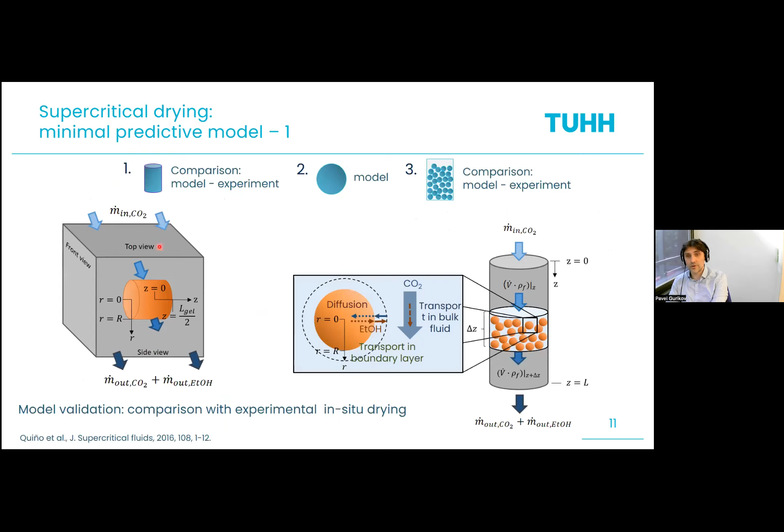Second thing you may ask: how much CO2 do I consume in all these cases? This model gives you a natural answer, because you always have the mass transfer and the flow rate of CO2, and then you can easily recalculate how much CO2 you need to introduce into the equipment.

With all this knowledge - and I have to be honest here - you also have to be ready sometimes to go blind. You don't need to wait until this knowledge is here. You go and produce big batches, and then you simultaneously do simulations, and merge this data to be able to produce large batches.

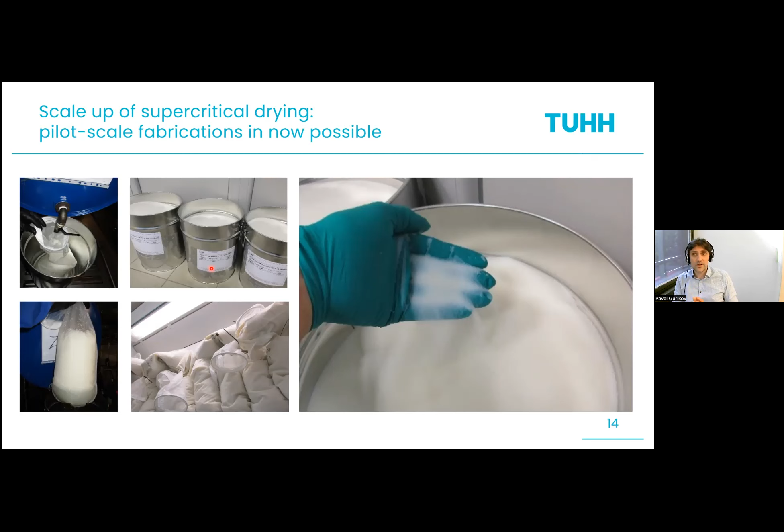Our philosophy at TUHH, at the Institute of Professor Smirnova where I'm working, is to go one step further: to make big batches of materials, just to test these materials - in particular biopolymer aerogels, which you see on the slide - in an industrial environment. That's the key logic and philosophy behind what we do.

Of course, we're also interested in the microscale, and we ask ourselves: do I have to dry what I get? Do I take the gel and just make aerogel out of that? Do I have any degree of freedom to control the microstructure? Because it's also important which microstructure you have for the application.

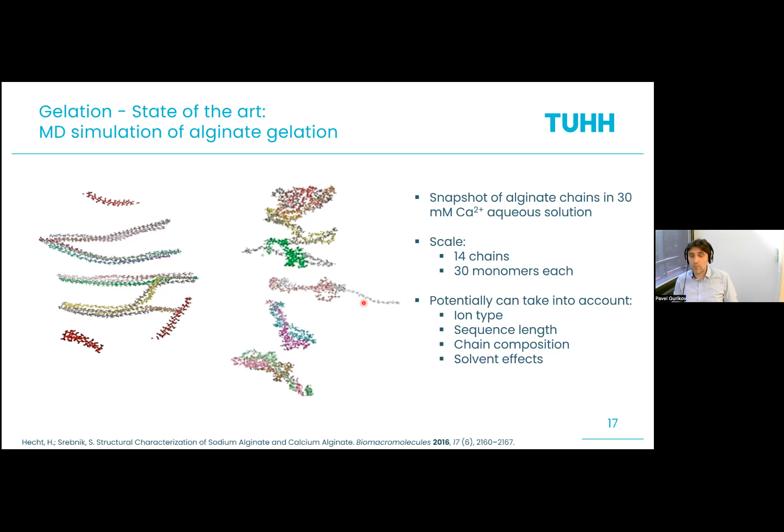So you can't really model the entire structure, but it does matter - we want to know how the pore size distribution is, how thick the fibers are, all these kinds of things. So it's still out of grasp currently, and with novel developments it may become possible at some point, but our philosophy is a little bit different. We want to go towards what we call coarse-grained modeling. I don't want to dive into details, I just want to say that we represent polymer chains in a simplified approach.

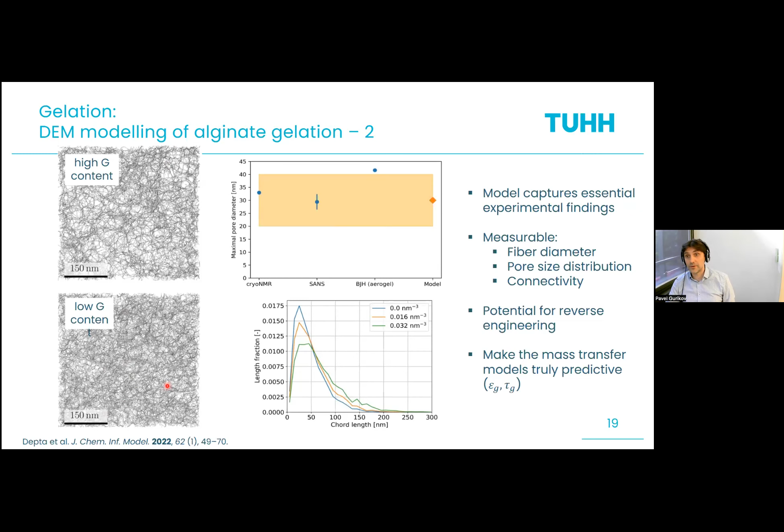There's always crosstalk between these two scales, but also crosstalk between application and fabrication, simply because of price. In some markets, like aerospace technology, you don't really care about price. In other cases, like the construction industry where the market is very established, you have to reduce price as low as possible. So there's no straightforward workflow for going from an idea in the lab to an application.

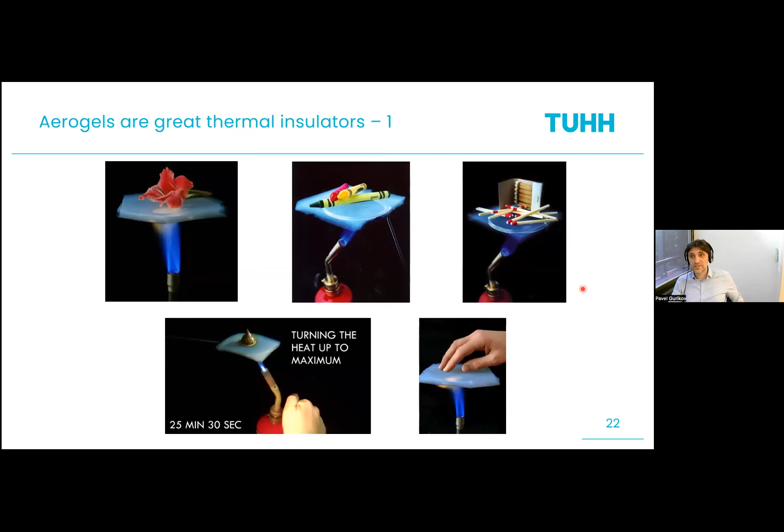That's why I decided to focus on one particular application aerogels are well known for: thermal insulation. If you Google aerogels, you'll see pictures like this, aiming to show that aerogels are great thermal insulators. Why is that? I love this cartoon—the simple reason is that air conduction is greatly reduced in the porous material. The air molecules are constrained within the small pores, so they're not able to efficiently transfer heat by molecular collision from one side of the heat source to the opposite side. Aerogels are the best materials in this class.

With all this, you may wonder why we don't commercialize these things. The answer is we do. In 2021, we founded a company called aerogel-it, to combine the best from all these worlds into one single class of materials. The motivation was: we know conventional classical thermal insulators are fantastic materials, but they lack renewable content. There are also materials with very high renewable content, but they lack performance—the thermal conductivity of cork or wood fiber is very high. For high efficiency thermal management in houses, we can't rely on these materials, but we also can't rely on synthetic materials because we're limited by crude oil. So we wanted the best of both worlds, and developed a family of biopolymer-based aerogels with very high renewable content, which was also very challenging to get to the point of very high insulation performance. We managed to do this, and that was only possible because of our long academic track supported by fundamental research.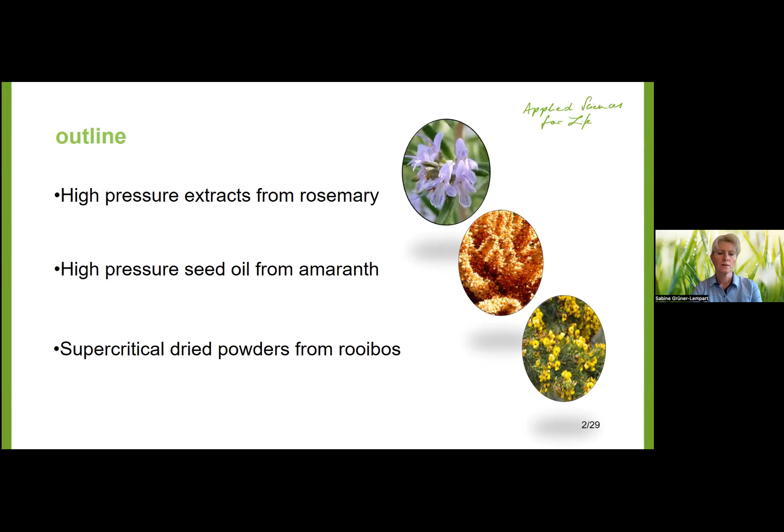I selected 3 examples, so 3 different plants and different ways to get products from them. The first one is the rosemary plant, where we get high pressure extracts from. The second is the amaranth plant, and the third is the rooibos tea plant. So let's start with the rosemary plant.

I think everybody knows the rosemary plant, and it contains really powerful antioxidants, which are luckily carbon dioxide soluble, so it's easy to get extracts from them. The valuable ingredients are first carnosic acid, followed by carnosol and rosmanol. These are all phenolic diterpenes, which can break the chain reaction during the oxidation of unsaturated fatty acids, just by rapid donating of a hydrogen atom to the lipid-free radicals. It's a well-known process, so this is a typical act of antioxidants.

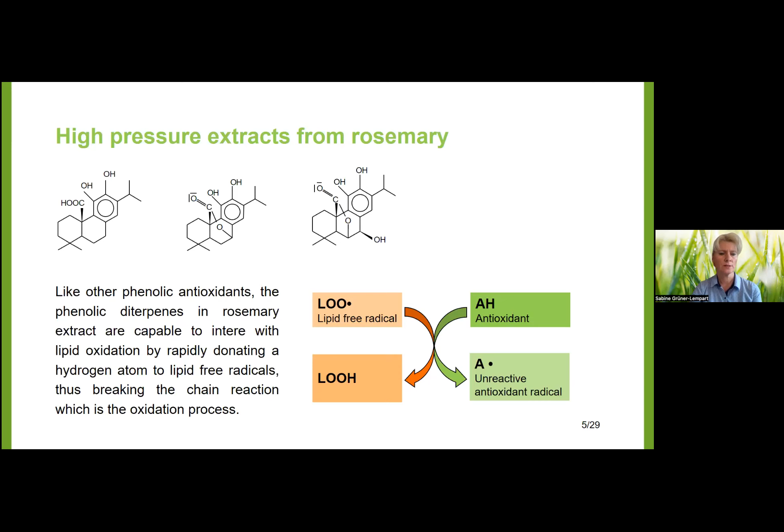To get a concentrate of these antioxidative ingredients, we do an extraction process with supercritical carbon dioxide. Before there is a grinding of the rosemary leaves with liquid nitrogen, because we have to avoid temperature and oxygen stress before the extraction, otherwise we would lose a lot of ingredients. Normally, the carbon dioxide extracts of rosemary are solid materials, which are not so easy to apply in many products. Therefore, we generate a fine extract powder using the PGSS technology, and this fine powder is easy to apply afterwards.

I'm sure everybody is familiar with high pressure extraction, so I'll go quickly through the process. You see the extractors where the plant material is placed, and the liquid carbon dioxide is heated and compressed to the supercritical state so that it can flow through the plant material and dissolve all the ingredients which are soluble at the chosen extraction conditions. Then afterwards we depressurize and get one, or in this case two, extracts in the separators. The carbon dioxide is recycled, cooled down to the liquid state, and transported back to the storage tank.

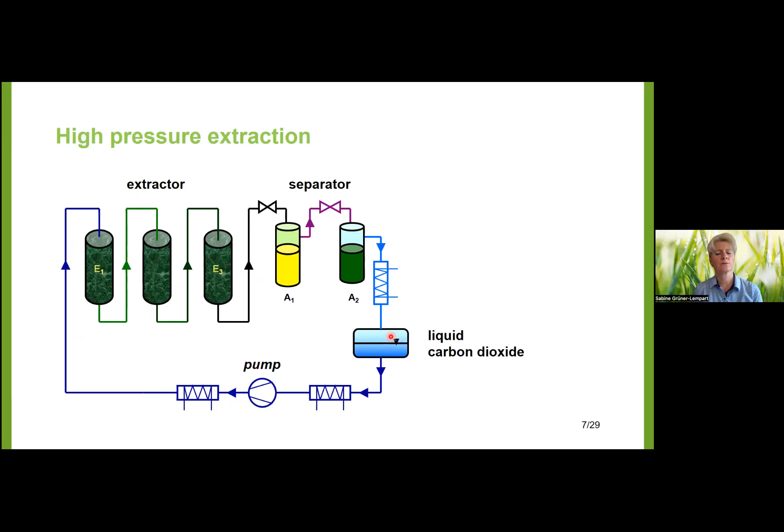You have heard about the PGSS technology today. I just want to explain it briefly. PGSS is the abbreviation for particles from gas-saturated solutions. What we do in the PGSS technology is quite easy.

We take the rosemary extract and the carbon dioxide, and both substances are fed to a static mixer to make the process continuous. In the static mixer, they are mixed intensively. Carbon dioxide is dissolved partly in the rosemary extract, and then the pressure is released rapidly to atmospheric pressure, and fine droplets are generated and finally solidified by the low temperature and the released carbon dioxide. So at the end, we get a fine powder in the spray tower, and maybe a fine dust fraction in the cyclone.

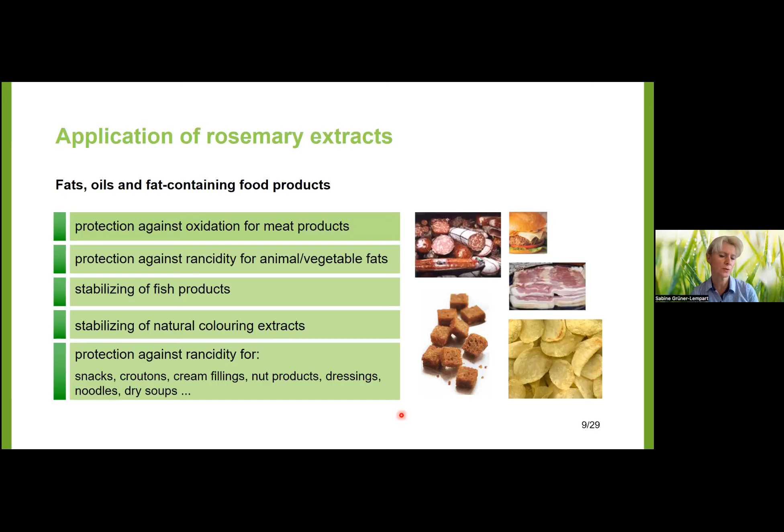These products are then widely applied in the food industry, especially for the protection of fats and oils in the product, because the ingredients can protect foods against oxidation. They can avoid rancidity, and they can avoid the decoloring of natural colors. Therefore, you find a lot of products in the market where you can find the rosemary extract inside - sausages, ham, burgers, croutons, potato chips, and so on. You just have to look at the backside of the food product and you can find the rosemary extract labeled there.

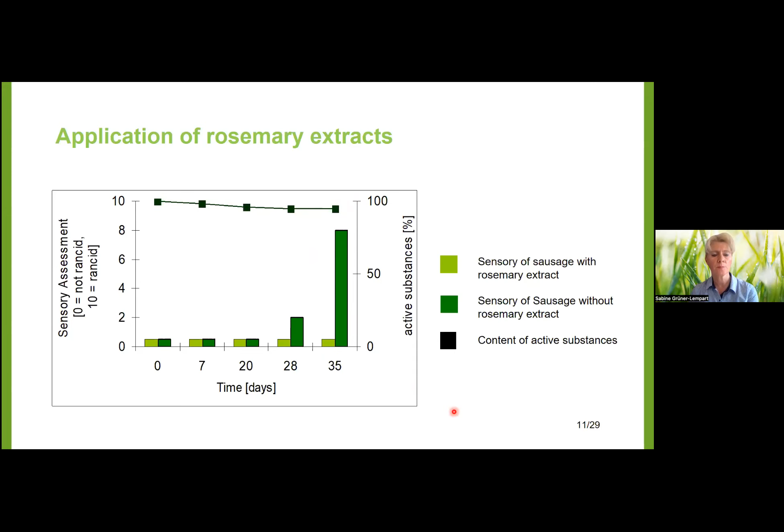Let's come to my second example. This is a high-pressure seed oil from the amaranth plant. Maybe you know amaranth - it's one of the oldest crops in the world, and it was a holy plant of the Incas and Aztecs. It has a good, positive image because of its unique ingredient composition.

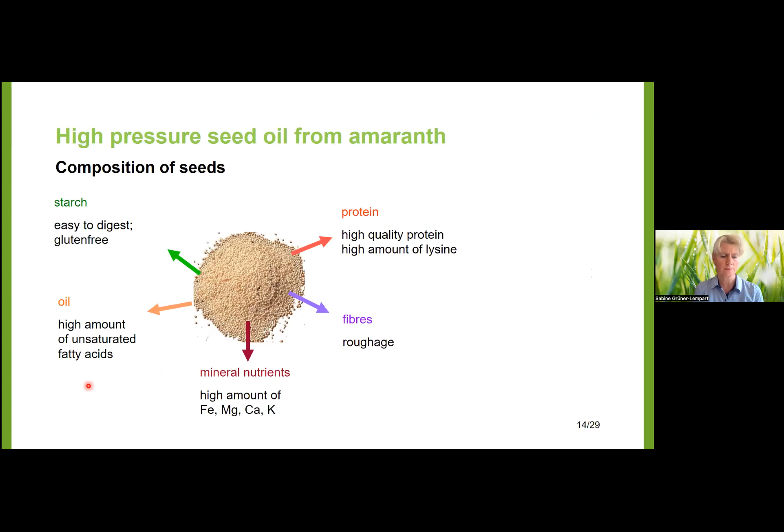Especially if we look at the seeds, we can use all parts of the seeds, but today I want to highlight the oil because it has a really high amount of unsaturated fatty acids. The seeds contain oil up to nearly 8%, so it's a really high oil content. We get this oil to avoid oxidation or quality loss by extraction with supercritical carbon dioxide.

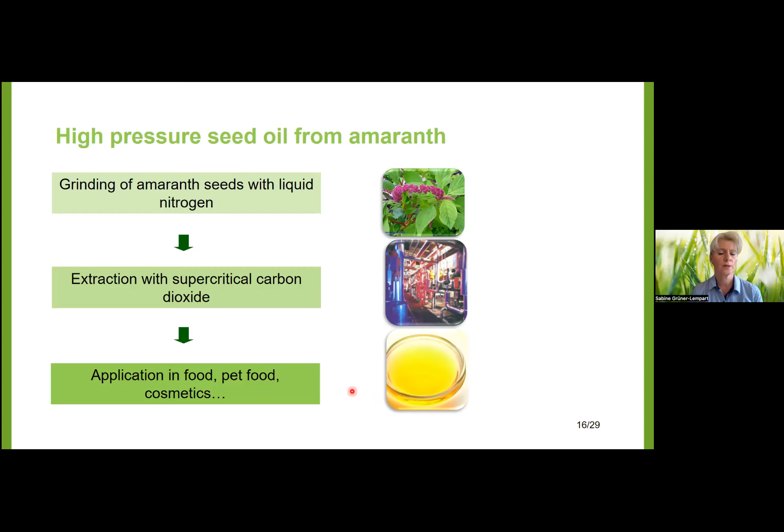Before that, we use a grinding with liquid nitrogen - you already know why, to avoid oxygen and temperature stress. The final product is a light yellow oil, which can be used in liquid form or can be used as a fine powder.

But before I come to the generation of the fine powder, I want to highlight the ingredients of this amaranth oil, because it has one unique ingredient, which is called squalene, and a lot of unsaturated fatty acids, vitamin E, and phytosterols.

Special is the squalene, which is a triterpene with a high antioxidative effect. It prevents against arteriosclerosis or cardiovascular diseases, empowers our immune system, and the recommended daily intake today is between 50 and 500 milligrams, depending on you - if you do a lot of sports, what is your weight, and so on.

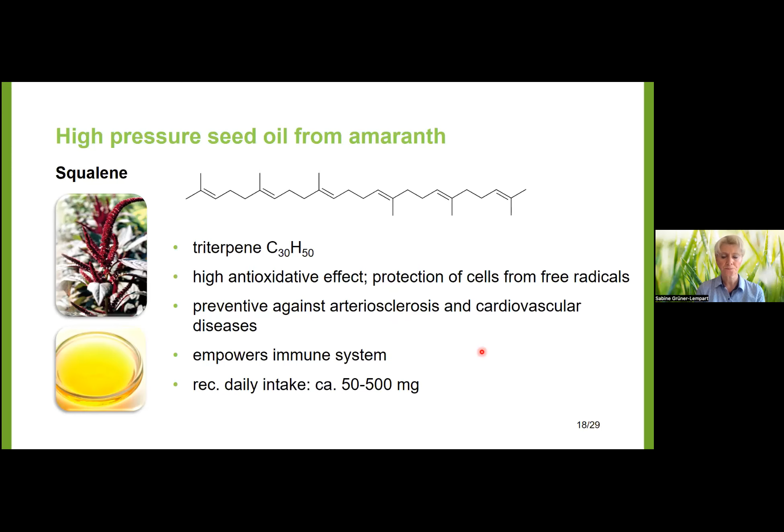Squalene, by the way, was discovered in 1906 by a Japanese researcher, and he discovered it as the main component of shark liver oil, especially in the species of Squalidae.

Unfortunately, millions of sharks are slaughtered just to get the liver, and the rest - the living fishes - are just thrown back to the sea. I'm sure you know these horrible pictures. You find a lot of food supplements in the market - if you look for squalene or shark liver oil, you can buy them in capsules, in oil, or any other food products.

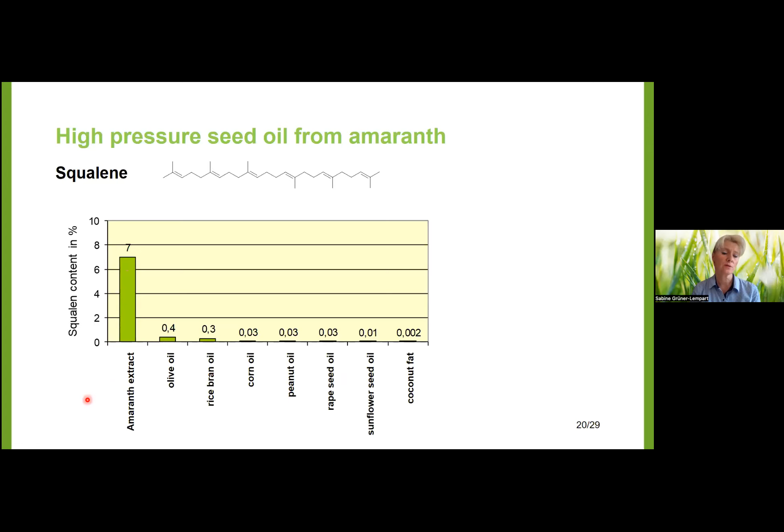So if you can't use the oil directly in the product and you need a powder form amaranth seed oil, then you can use the CPF technology. The process is quite similar to the PGSS technology I explained before, with one exception. But first, CPF is the abbreviation for Concentrated Powder Form.

Similar to the PGSS process, we start with a liquid and carbon dioxide, and both are fed to a static mixer where there's intensive mixing. Carbon dioxide is dissolved partly in the oil, and we get a fine spray during the depressurization up to atmospheric pressure, resulting in very fine droplets in an oxygen-free atmosphere and at low temperatures.

In these fine droplets, we add a carrier material which binds to the liquid and forms a fine powder, which is finally released from the spray tower. The carrier material can be any kind of powder: starch, cellulose, sugar, silicic acid, and so on - there is no limit. The carrier material just influences the amount of oil you can add.

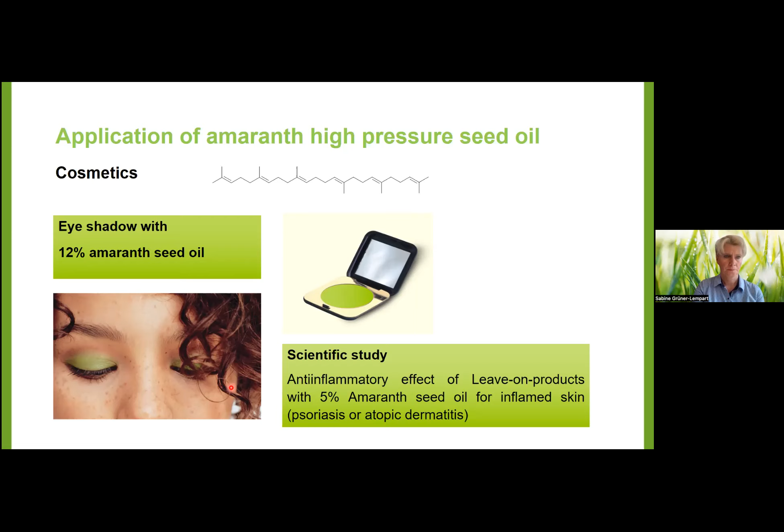So we come to my third and unfortunately last example. Of course, I could talk for hours about antioxidants in supercritical fluids, but today I will close with a third example, and this is about the rooibos plant.

Maybe you know rooibos tea. Rooibos is a bush which grows in South Africa. It's a traditional tea plant, scientifically known and written about since 1775, and it grows only in the Cederberg region of South Africa. It has a strong positive image, not only in South Africa, because it's a caffeine-free tea and a very healthy beverage. The reason is one component: a flavonoid called aspalathin, the main active ingredient in the rooibos plant.

It has a lot of effects: antioxidative, anti-inflammatory, anti-allergic, antimicrobial, and scientific studies show that it also enhances well-being.

To get aspalathin as a high concentrate, it is necessary to use green rooibos leaves. I'll explain why in the next slide. There's grinding with liquid nitrogen, but then we do not do a high pressure extraction with supercritical carbon dioxide. Instead we do a solvent extraction at atmospheric pressure, but a two-step extraction to concentrate the aspalathin in the final extract. Because aspalathin is not very stable in liquid extracts, we do a PGSS drying, a supercritical drying process with carbon dioxide, to get very fine powders at the end. These are stable, storable over years, and can be easily applied to products in food, dietary supplements, cosmetics, and so on.

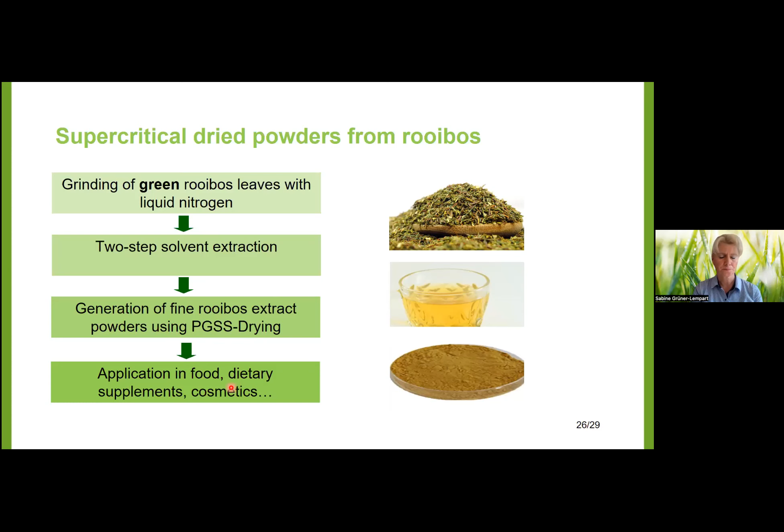So let's come to the green rooibos leaves. Normally in South Africa, farmers dry the leaves in the sun, and fermentation takes place. This fermentation leads to the well-known red color of rooibos leaves and also to the well-known sweet flavor of rooibos.

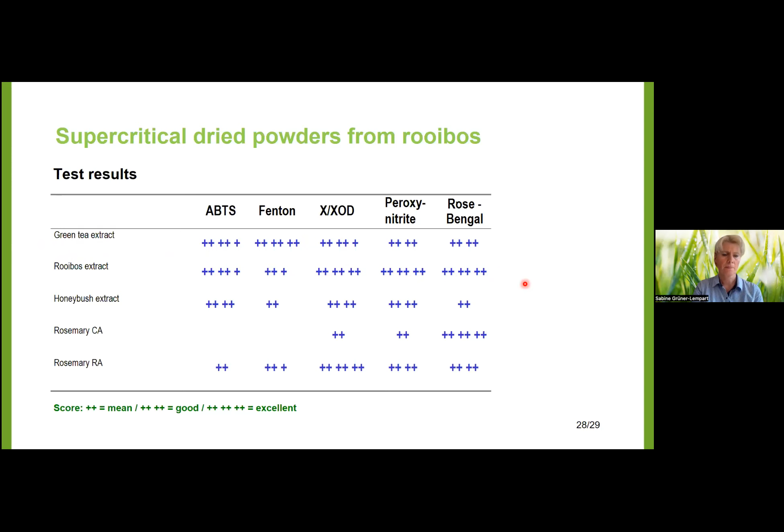Therefore, it is used in a lot of applications. In South Africa, it is well known, and there are hundreds of products on the cosmetic side, especially for leave-on and skincare products. In Europe, it is better known in food products, especially dairy products or beverages. But if you look at the World Wide Web, you find thousands of products including rooibos, but you really have to check if there is a green rooibos extract inside, because then you have a high antioxidative potential and a high level of active ingredient.

So I'm at the end now. I hope I could inspire you a bit dealing with plants, dealing with antioxidants, and combining it with supercritical fluids, because with them we can really achieve high quality products with a high antioxidative power. I say thank you for your kind attention, and of course I want to thank all the people who were involved in the scientific studies and in the scientific work over the last decades. Thank you.